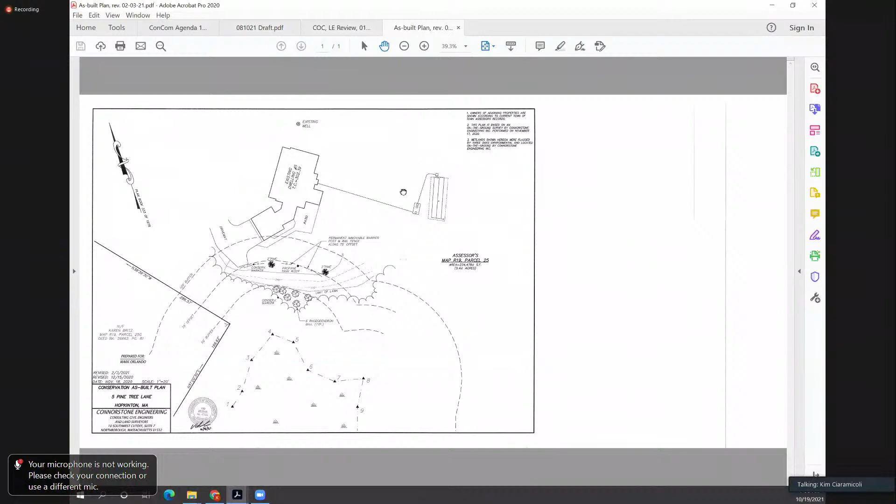So this is one that Matt had provided a review earlier this year, looks like January, and there were a couple of items to be addressed. I think it was PIBs, an underground propane tank, and a stand of Japanese knotweed. The order of conditions had specifically called out that the Japanese knotweed needed to be maintained. I had gone out there again this summer and noted that the Japanese knotweed was not being managed. The homeowner reached out to me to let me know that it had subsequently been managed. I did a quick site inspection this week and was able to confirm that the knotweed has now been eradicated. I was able to spend some time with the homeowner for some education as well regarding management and general good housekeeping, being a neighbor to wetlands.

Okay, great. Thank you, Kim. Questions or comments from the commission members? Yeah, Kim, I just have a question. What did they, how'd they do that?

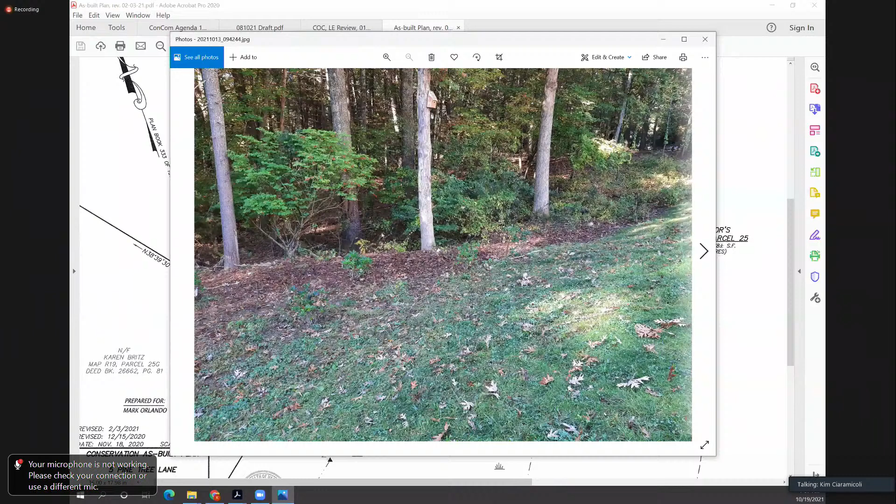Yeah, so he definitely did an application of herbicides. You can see the barren landscape. I had a conversation with him about that's not necessarily the commission's preference. He did have a very large stand that needed maintenance. We talked about in the future, stem painting instead of a large application, and methods for manual removal now that he has it under control. Just kind of a maintenance role rather than an application of herbicides in the future.

All right, good. Thank you. So the chair, this is Ed. Yeah, go ahead, Ed. This opens the door for me to talk about the fact that we've got invasives all over this town, and somehow somebody has got to get their hands around it. I'm not sure who that somebody is, but I will shut up at this point. But this is something I think that Concom needs to look at.

Okay, thank you. Any other comments from commission members or the public? Okay, if I can get a motion to issue the certificate of compliance for 5 Pine Tree Lane, please.

I'll move. And a second, that was Jim. Second, this is Ed. And we'll do the roll call vote. Melissa, Aye. Carrie, Aye. Janine, Aye. Ted, Aye. Ed, Aye. Jim, Aye. And Jeff is an aye.

Okay. Kim, do we have any public forum requests? We have a few minutes. We do not. Okay. All right, let's just jump right into the agenda then.

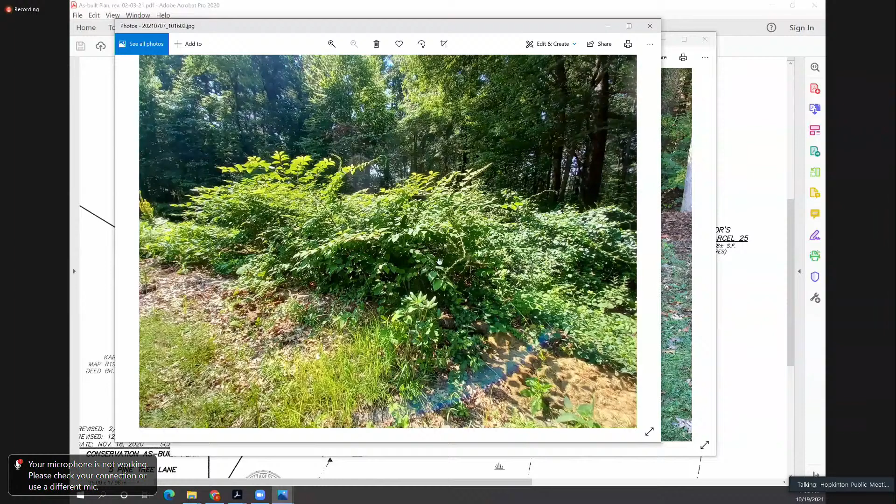Toll Brothers, Lot 12, Chamberlain Street. This is a continuation of a request for reconsideration. Do we have a representative from the applicant on the call?

I see Tim has the plan up in front. I'll make it brief, just a quick history on where we've come to tonight and where we stand. So an order of conditions was initially denied for lot 12 under the local bylaw for the home being within the 100-foot buffer zone. Subsequent to that denial, the applicant requested reconsideration. Along with that request, a revised plan was submitted, showing the home moved forward by 30 feet and outside of the 100-foot buffer zone, providing a very similar design to the other lots within the development that were recently reviewed and approved by the commission. However, to do this on lot 12, we did need a variance for front yard setback from the zoning board, reducing the front yard setback to 30 feet.

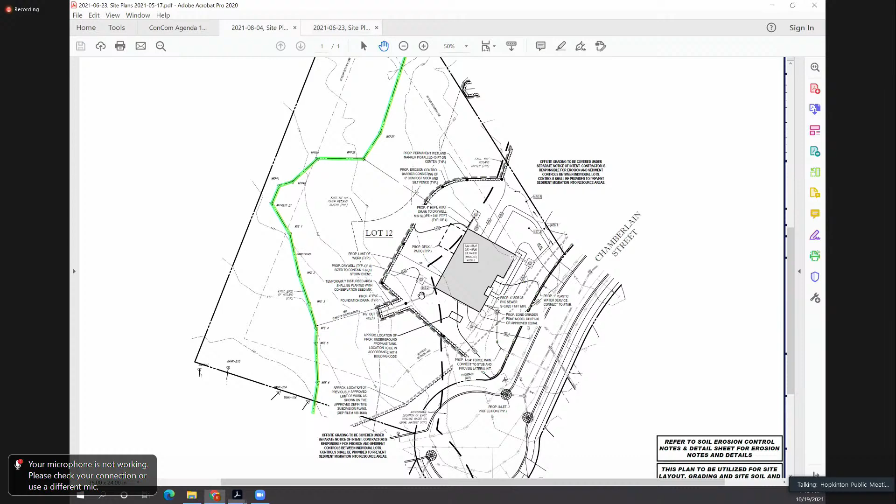Thought that was like communication from interstellar space or something, but anyways, okay.

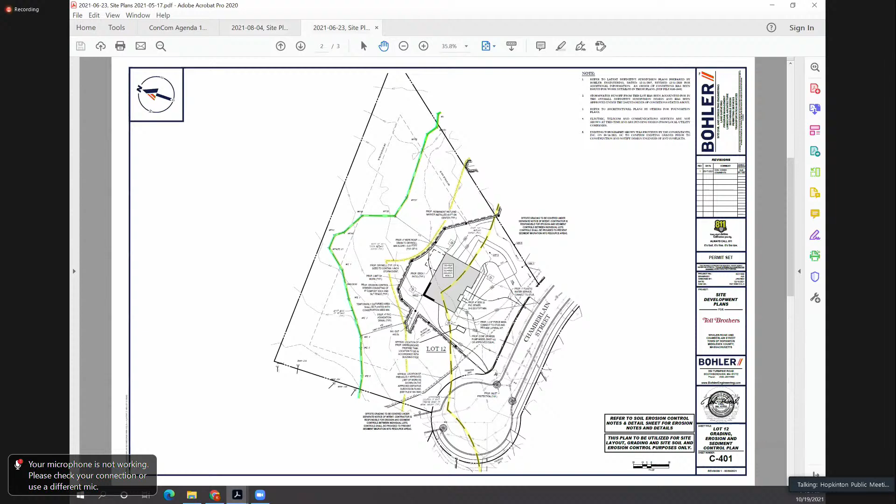McKinnon, 55 Elm Street. This is a notice of intent for a septic replacement, and I have to read this before we get started. The Hopkinton Conservation Commission will hold a public hearing on October 19th, 2021 at 7:00 p.m. virtually online to hear all persons interested in a notice of intent filed by Judith McKinnon, trustee, to repair a septic system with associated site work. The location is 55 Elm Street, assessors map R23, block 21, lot 0.

Okay. Do we have a representative? Yes, can you hear me? Yes. This is Dale McKinnon. Judy McKinnon is my wife. I'm a civil engineer with Guerriere and Halnon.

The design has moved forward. It's a septic system repair. The system is moved forward as close as we can. We got a variance from the Board of Health to move it as close as we could to the road and move it away. You'll notice that the lot is entirely within the 100-foot buffer. The existing system was actually built within 25 feet of the wetlands.

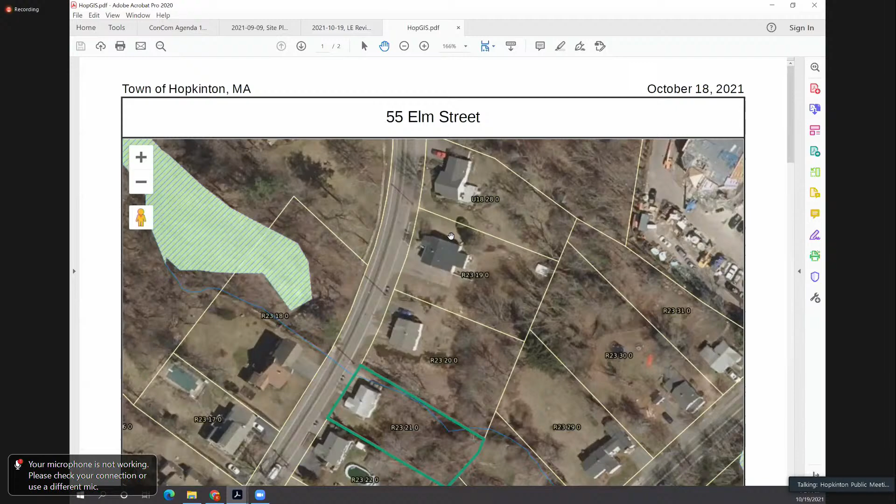Okay, all right. I'm of the opinion that I don't want the homeowner to bear the cost of doing the stream status analysis, to Matt's point, based on the scope of the project. But let me open it up to questions, comments from the other commission members.

I think I'd agree with you, Jeff. There's Melissa, it's a tight site. I don't think they have much alternatives here. Right, yeah, okay.

Okay, questions or comments from the public? Through the chair. Yes, Kim, go ahead. Just for the applicant, if you could describe how the old septic system will be removed, kind of soil management and removal procedures on the site.

The existing system is further in the fill area, so I wasn't intending... you see where the septic tank is proposed, most of the system is in that area. I hadn't even thought about removing that existing system. We're obviously going to excavate near the house, and as necessary, if there is any part of the existing system, it would be removed under the proposed system. But I do not believe that the majority of the system is in where we're showing the proposed fill on the east side of the proposed septic tank. Does that give you the information you look for, or is there something else?

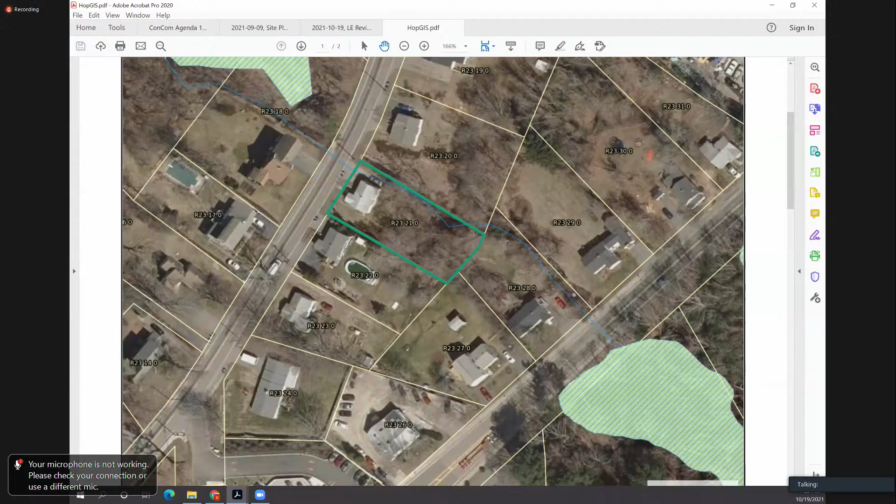Okay, all right, great. Thank you, Mr. McKinnon. Good luck. Thank you. Through the chair, I'd like to thank Kimberly for all her help with us. Thank you very much. Thank you. All right, have a good evening. Good night. You're welcome. Bye-bye.

Okay, Ravenwood, 0 Hayden Row. This is a continuation of a notice of intent for the subdivision.

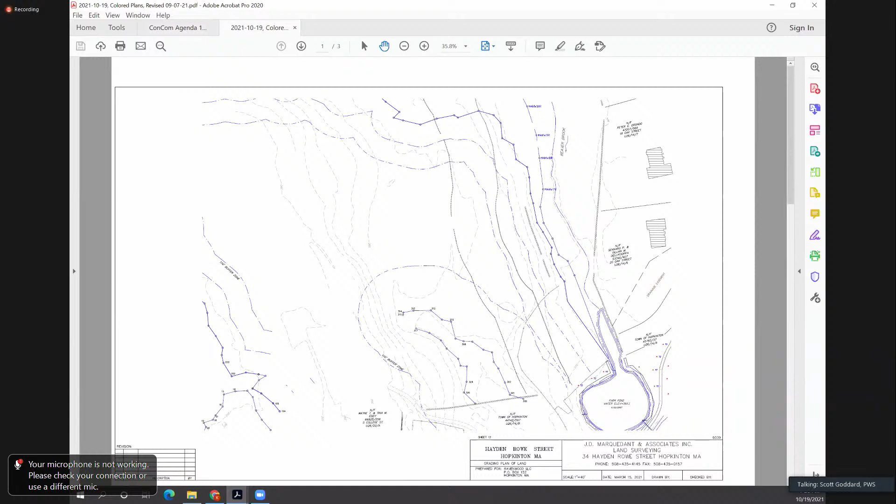So Scott Goddard is here from Goddard Consulting, representing Ravenwood LLC. I guess before we start this hearing, I'd ask the commission how they would like to procedurally move forward with this and the subsequent hearings we have coming up. We filed notices of intent for many of these lots. Should we narrow the focus to just the subdivision at this moment and then go through one lot at a time? Is that how you'd like to proceed?

Yeah, why don't we do that, Mr. Goddard, because I think we still need to kind of vet out some of the issues that were raised previously. I think those may have an impact on the individual NOIs. So if we could go through the subdivision first, that would be great.

Yeah, no, I think that's perfect. So Kimberly has a good graphic of the limit of work boundary overlaying with the wetlands and the subdivision. We've been before you for a couple of meetings on this project, and originally this notice of intent was submitted to include the road and the houses.

Per the request of the commission, we subsequently revised the NOI submittal so that this application before you is simply for the subdivision roadway, which includes a wetland crossing with wetland replication, as well as the utilities, which includes the stormwater infrastructure. That stormwater infrastructure is the work proposed within Riverfront area to Beaver Brook, which is off to the right-hand side of the property.

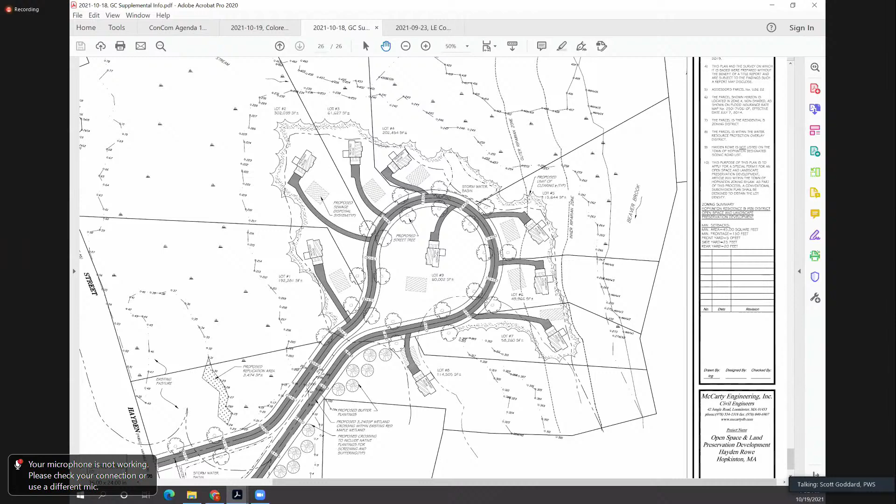We now have 0 houses in the riverfront area instead of 3. And the only work within that riverfront area is stormwater management, which is explicitly excluded from the 10% calculations in 10.58, so we don't even need to count that area against the 10%.

At the end of the day, we're going to have something functioning for stormwater controls that will be a vegetated surface. So it still provides vegetated buffers, wildlife habitat, storm damage prevention, pollution prevention, and the interests stated as reasons why we protect riverfront area are satisfied by the presence of the stormwater management system in this location. So it's our belief—myself, the engineer, Mr. Marquedant, the applicant—that a lot of thought was put into this plan to preserve open space and the riverfront area in its largely entirety on this property.

So that information was included to help the commission understand why and how this design was selected and how it protects those interests. The other items that were brought up in the LEC report and some of the previous conversations with the commission, I think were less significant than those topics and were addressed administratively in the report. If Matt or Kimberly or anyone else on the commission would like to, we can tackle some of those other items, but I think those were the big items that might be worthy of conversation.

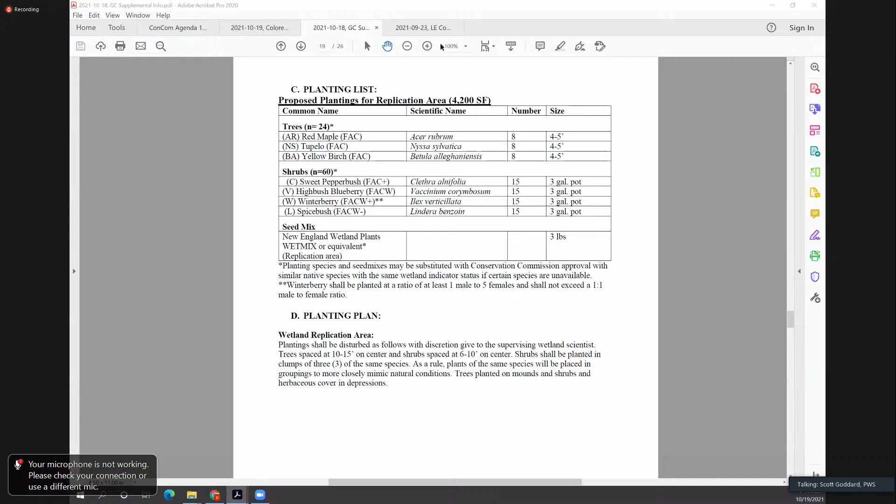So Scott, basically this was submitted yesterday, the update. Yep, so that's kind of what's—I think because this information was submitted yesterday, Matt hasn't had a chance to update his comments. I understand that completely. So this planting list here is the specs on species that were called out, and further down is a schematic on how those species could be laid out.

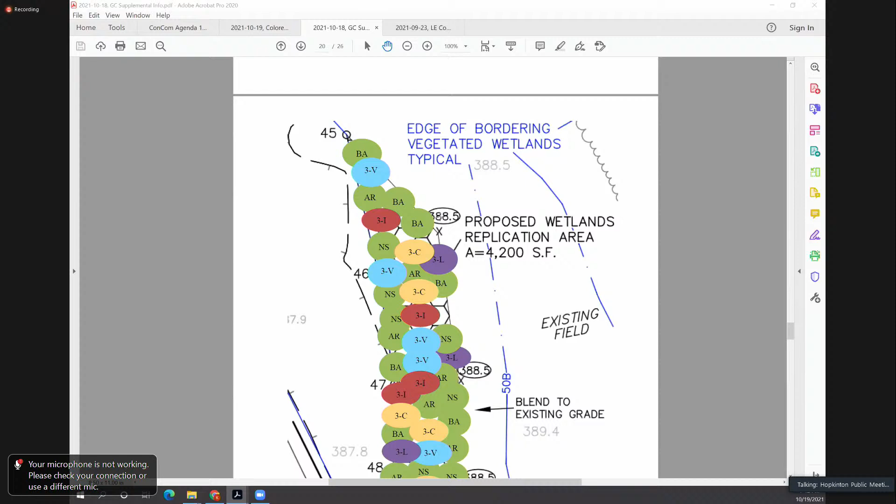Okay, I didn't see it, I didn't realize it was an attachment. Okay, and I think we basically decided that rather than get into all the machinations of maintaining something as a wet meadow for the small amount of total square footage we're talking about, it's easier to guarantee the longevity of success with the forested methodology. That's all. Okay.

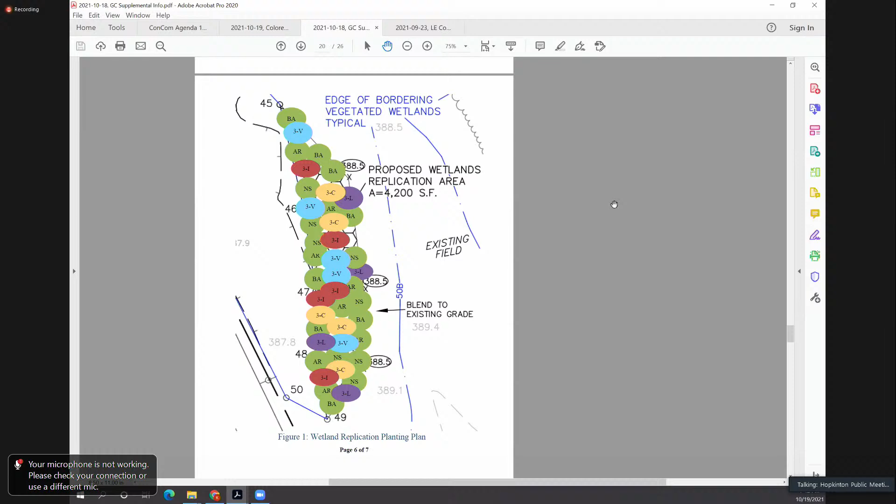Okay, and the last comment I had before I hand it over to the other commission members was on the riverfront area. I appreciate the work you guys did pulling the individual houses out of the riverfront area, I think that's great. I just think there's an opportunity, and I think that's the right area for the detention basin. As you mentioned in your overview, Scott, that's kind of the low elevation at the site. So I agree with it.

But I think there's an opportunity for pulling that detention basin a little bit further out of the riverfront area, and minimizing or decreasing the lot sizes or yard sizes in lots 6, 7, and 8. So we don't go as far back with the lawn area, which would allow that detention basin to be pulled out of the riverfront area a little bit further. So that's my only comment there.

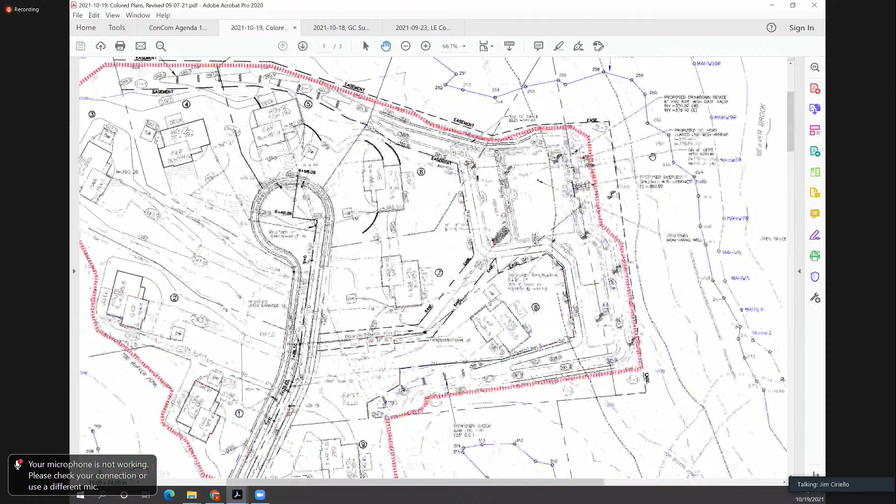And I'll open it up to the other commission members for their questions and comments. Jeff, this is Jim. I just have one comment, and that is that I think the construction sequence and construction plan needs to be part of the order of conditions, so it needs to be submitted before the order of conditions is issued. That's it.

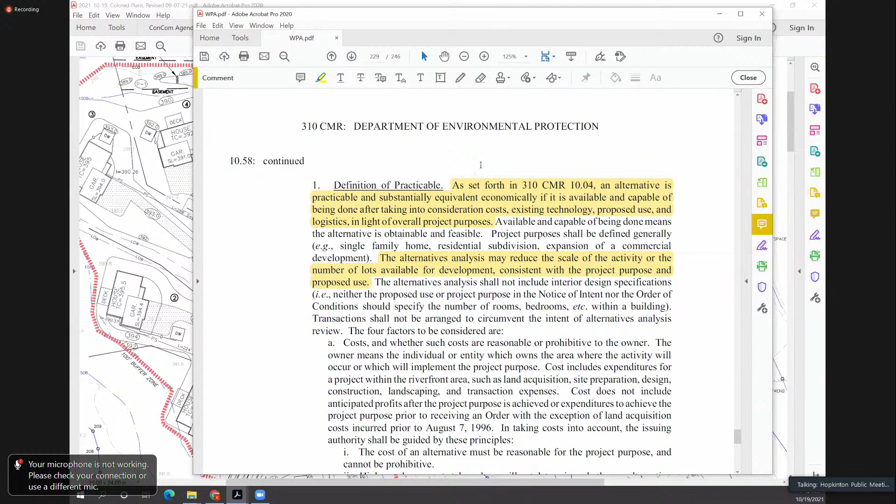Yep, that's helpful Kim. That definition does deal with the practicableness of it. As we saw from the Chamberlain subdivision project, it wasn't riverfront, but there was a practicable alternative that ended up reducing the number of lots on that project. In that case it was fewer lots, larger houses, and the economics of those houses became different. So there's an economic component because it's an economically equivalent practicable alternative that is considered. The practicableness is one part, but then there's the economic piece tied to the evaluation as well.

Right, and in Chamberlain that was a conventional subdivision, not a cluster. So in this project, what Mr. Nation is doing is a cluster subdivision, which means reduced frontages, narrower lots. These houses aren't going to be at the same humongous scale as some other subdivisions might support, so the economics of this scale of house versus a different scale plays into that analysis. One lot here makes a big difference on this project.

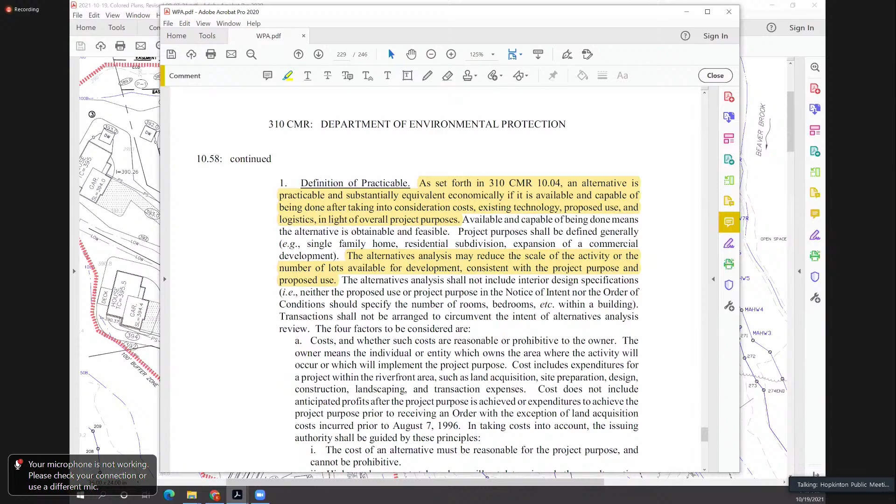And like I said, I'm not averse to having the detention basin in a portion of the riverfront area. The 10% alteration is at the discretion of the commission, it's not by right. To my earlier point, I think there's an opportunity where that could be pulled out a little bit further out of the riverfront area.

That's my opinion, Mr. Chairman. If Joe could chime in here for a moment, I think it would be helpful. Yeah, that's what I was going to suggest. Joe's looked at this a little bit. Joe, you there? Yes, I am.

Would it be helpful, Joe, if you could comment on how these are sized and located, and what efforts we took to shift these things around in order to preserve that riverfront zone? Oh, absolutely. As Scott touched on before, there are a variety of design reasons for the placement of the basin, to get as low as we can, to get in the flatter areas of the site, use other steeper areas more for conveyance, and here for the infiltration.

We've chosen this location to capture all the water that we can, so that in other spots we can reduce the clearing associated with the infrastructure. We've left what we feel are sufficient backyards to balance the two interests. We've attempted to pull it further from the resource in order to minimize the concerns of the commission, which was the reason for the change we made. But it's the balance we're seeking: enough room for these homes and yards, and still an effective way to capture and treat stormwater.

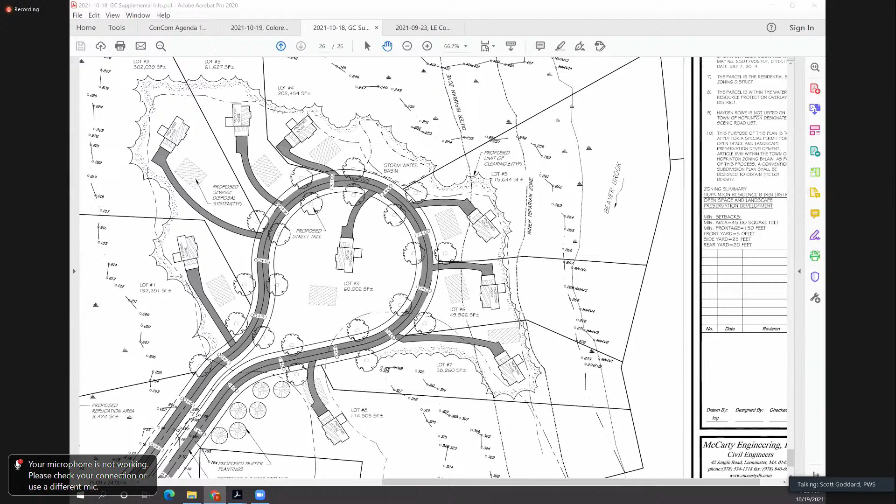I've done hundreds of these types of analyses, and this is the kind of process we go through in order to bring the best project before you. A lot of work goes into planning and designing this. I don't just like to bring proposals that are outlandish, knowing you won't approve them, just to get beaten back. I see certain applicants and consultants do that kind of thing, and that's not productive. This is a sophisticated board, so it takes a lot of time to come before you with a good project. And I think that's been done here.

Yeah, no, we appreciate that, Scott.

So, looking ahead a little bit here, when we look at the individual lots for 6, 7, and 8 on the single family homes, in the past couple subdivisions approved by the commission, there was yard work proposed close to the 50-foot buffer zone. The majority of the commission was asking for the yards to be minimized and pulled further away from the 100-foot buffer zone.

So, back to my point with the detention basin - I heard Mr. Marquedant say there was a balance between what was required for the proper engineering of the detention basin, balanced with the yard size you feel is necessary for the houses proposed here for 6, 7, and 8. Again, I just think there's an opportunity to possibly pull that a little bit closer without impacting the effectiveness of the detention basin.

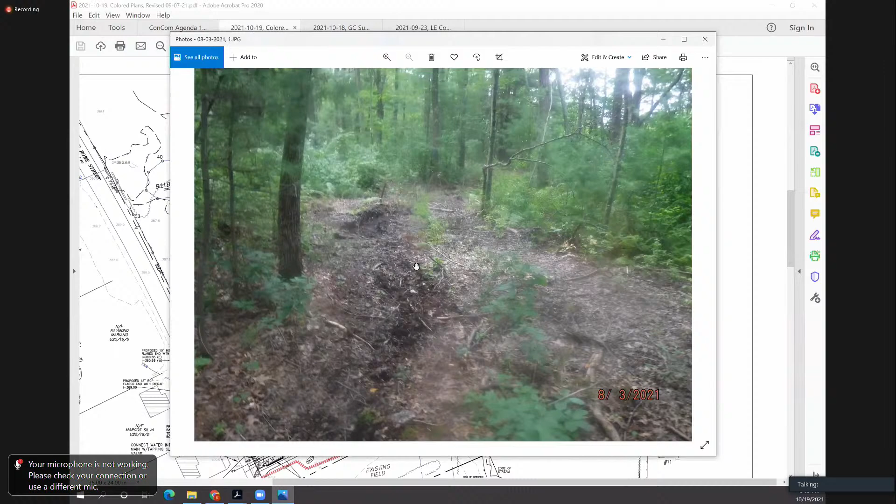Oh, sorry Matt, go ahead. I forgot that - I guess my question would be, is there any data to back up Mr. Goddard's comments as far as wildlife studies or anything like that in this area?

Yeah, Matt, if this is an important topic to you and the commission, we can dig into the literature a little bit and deal with this issue. Seems important to Mr. Harrow, and I won't speak for the rest of the commission, but I think it's certainly one of the more important values and functions of wetlands is wildlife habitat, and I think it's a legitimate discussion point.

Yeah, if you want to do some research, Scott, I get your point from a practical standpoint - trying to divert the wildlife to a culvert in one section of the roadway for the crossing is probably going to be difficult. The animals are going to go where they're going to go, up over the road, particularly if there's gentle slopes. But if you could look into that, it would be helpful to satisfy Mr. Harrow's request. Okay, thank you.

Okay, questions, comments from the public? All right, so we'll continue this to our next meeting, which is November 2nd. If you can just send Kim an email, Scott, that would be helpful. Will do, thank you.

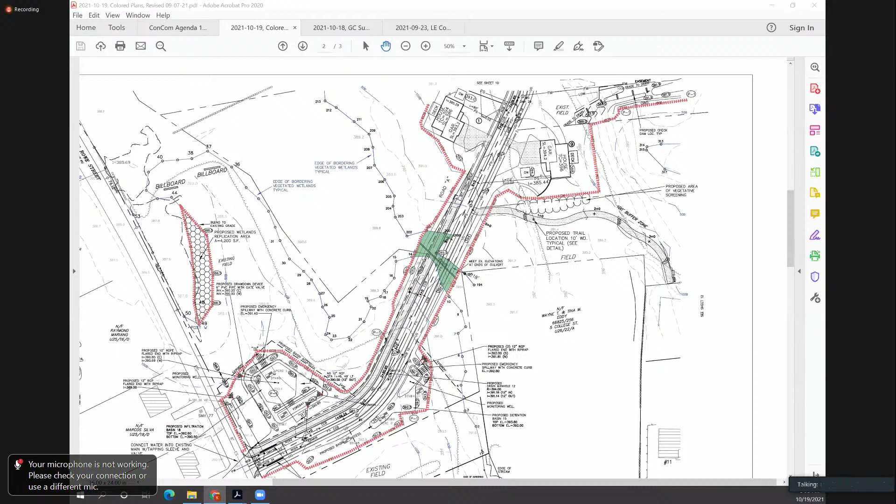All right, let's start with Lot 1. So I emailed over to Kimberly - what I did with each one is create a map to show which lot we're talking about in its broader context, and then a colored up map of the specific work being requested on each lot, so it should help our discussion so we're all oriented as to what lot we're talking about. So the first one here is Lot 1, which is the first lot to the left after you go over the wetland crossing. That's the area outlined in yellow.

So we submitted a notice of intent. DEP issued a file number, 188-1766. I believe 3 of the applications were granted file numbers and some of the other ones were not.

So this is work for a minor amount of grading and lawn within the buffer zone. On Lot 1, none of the house is proposed within the buffer zone. The house is tucked up to the road based on zoning setbacks, and the 50 and 100-foot buffer zones are outlined in red to the approved wetland line per the ANRAD.

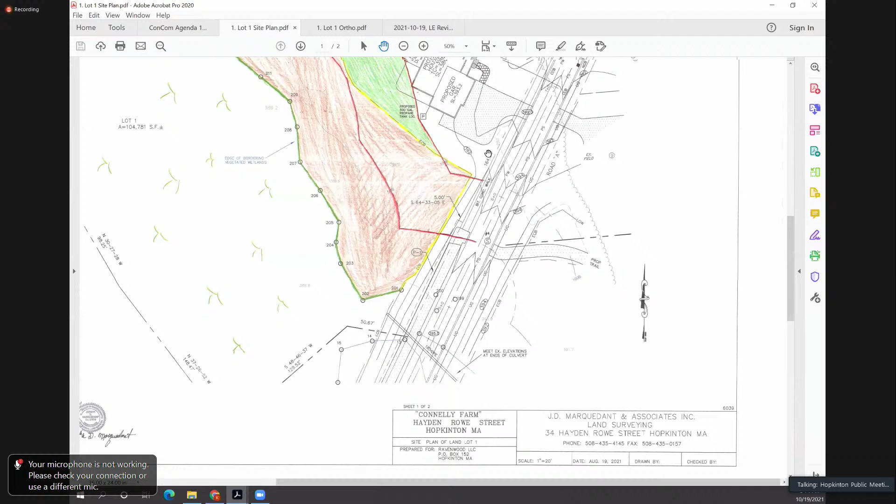Also throw out for consideration, it was a cluster development. There is—and I don't recall the total acreage—that's committed to open space. I don't know if you have that number, Mr. Goddard. But that all plays into the 50 to 100-foot discretionary kind of disturbance that the commission allows, right? So I just ask that commission members also consider the open space, the cluster development, as additional factors when you're drawing your conclusions and decisions on this. Not to sway it either way, but I just want to make sure you're cognizant of that when going through the thought process.

Mr. Chairman? Yes. 18 of the 32 acres is preserved as open space. Okay, thank you.

So I wanted to throw that out there just so everyone has it at top of mind.

Okay, Scott, I think you have your feedback on this one. Well, Mr. Chairman, I'd like to make a broad response to it, because we're heading down a path of having a similar conversation seven more times. So I think it would be helpful if I share some of my thoughts now, and then I can just hit the repeat button in the future rather than restating it.

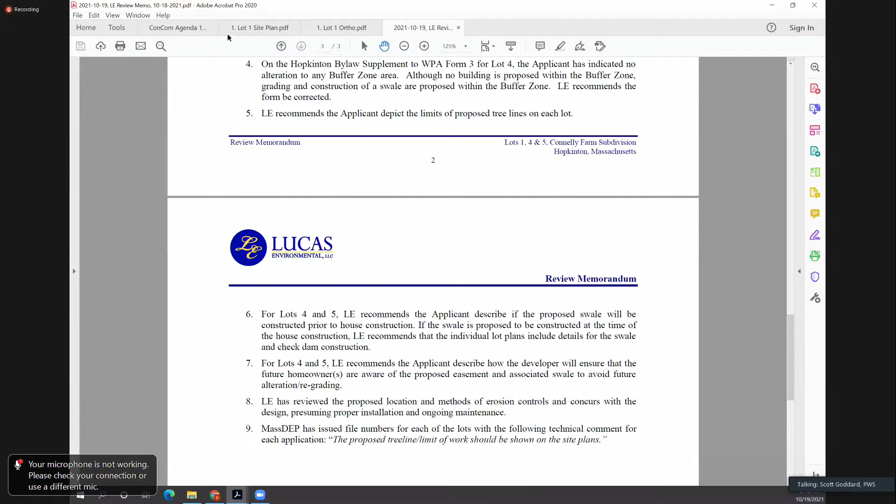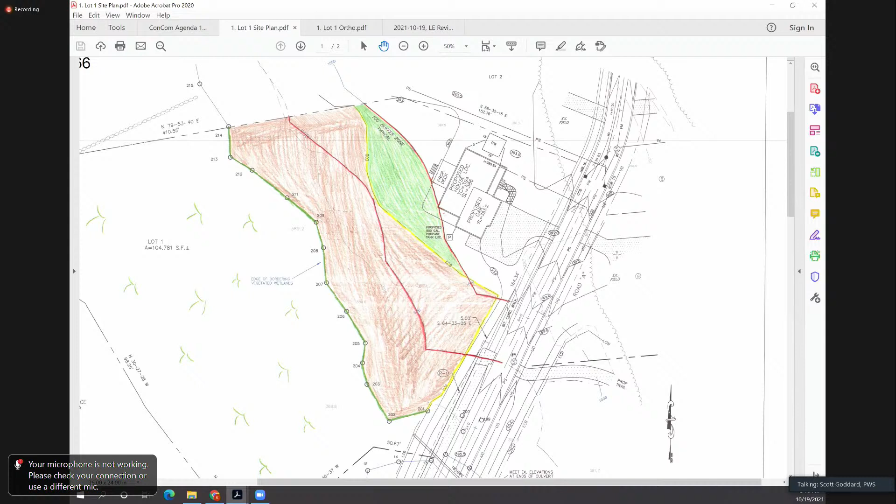Makes sense. I do a lot of work in Hopkinton, and I've been before this board many times over many years, and I've watched it change personalities and dynamics as the regulations have been implemented. I've seen different types of projects come through, and Hopkinton has a great board. I go before hundreds of towns in Massachusetts, and probably 100 on a regular basis, and Hopkinton is an excellent board with a good set of regulations to work with.

So I'm not ignorant when it comes to understanding the dynamics of commissions, nor am I ignorant on how regulations are written, and the difference that happens in their interpretation based on the dynamic of a commission at any given point in time. That said, it does seem there's been a shift over time in the view of the 50 to 100-foot buffer zone that has not necessarily mirrored a shift in the written regulations.

There was a time in Hopkinton where the regulations stated there's a presumption of protection of the resource area, that is the wetlands itself. There's a presumption that they're being protected if you keep your work, not just grading and lawn but structures as well, outside of certain buffer zones, and that the limit of work for your yard was kept out of 50 feet. It even states you can have driveways up to within 10 feet of a wetland, and there's a presumption of protecting the interests of those wetlands.

And I know it's been kind of a popular sentiment with the board to treat the 50-foot as completely discretionary on behalf of the board. Now, it is insofar as applicants rely on the vote of the board. But the way the regulations are written, and I've written narratives on this, particularly on the Lot 12 analysis for Chamberlain most recently, but on other projects as well, there is clear language in the bylaw that states that wetlands are presumed protected if these setbacks are satisfied.

So likewise here, notice of intent was submitted. The 50 and 100 foot buffers are shown in red. The house is, again like lot 1, completely outside of the buffer zone. And the lawn area, again very similar to lot 1, is split between the 50 and 100. We're not proposing work all the way down to 50 - it's sort of at a midway point. That gives the applicant an appropriate and saleable asset for the buyers, and also preserves the 50-foot and then some of the buffer zone. I don't think this one has been assigned a DEP file number yet.

Okay, I'll open up to comments from the commission members. Hi Jeff, yep go ahead Ted. In the interest of time I'm just going to bite my tongue as we go through these. If there's green, I want to know if it can be minimized - that's my comment for all of the lots coming up. Any other comments from commission members? Comments from the public?

Okay, you want to move to the next one, Scott? Sure thing. Just for the record, since this is technically a separate application, I would echo my earlier comments as applicable to this application as well, and to all the subsequent ones. So I understand Ted's position - I do, and I don't mean to dismiss it Ted, but my comments will continue to be the same. Through the chair - yes go ahead Ted. And again, Scott, I am not saying there should be zero green at all. I just sense in the lots I've looked at that we can cut back how much lawn is there. So I'm not trying to be unreasonable either. Hopefully we can continue to get along. Yeah, no problem.

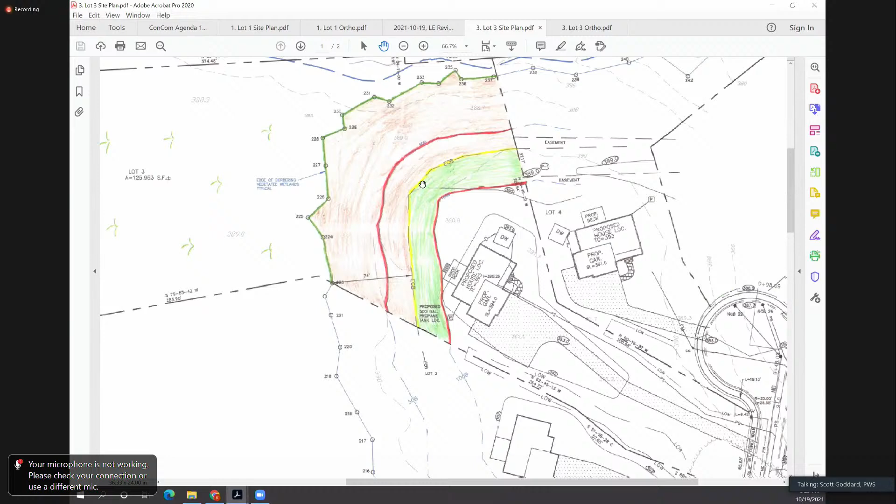So this is lot 3, I believe we're looking at here. Yep, and we can scan down. Again, just working up the left side of that subdivision road. So the discussion for lot 3 mirrors that of lot 2. Again, the house - to the credit of Mr. Nation and Joe Marquedant, I think they did an excellent design here to shape these lots in such a way. You can see how they have a narrow shape by the road. That's to keep the reduced lot frontage for the cluster. But it also makes it so the houses can't sit up close to the road because of the narrowness of them, pushing the house back until the lots widen a bit. But here again, no house within the 100-foot buffer zone. I think to the applicant and engineer's credit, they did a good job with the design, and there's the same 100-foot discussion, more or less splitting the difference between lot and open space, and preserving the entirety and then some of the 50.

Okay. Lot 4. Or lot two. Yep, go ahead Matt.

Just a quick question on this lot, and I understand it's outside the buffer zone, but I think it gets back to the location of the house and which gets into the backyard. It seems like there's an extremely large area of pavement in front of the garage there. Is there a reason for that?

Basketball court? Well, I think Joe can maybe comment on this. I think it has to do with the turnarounds, but there's also some angle points on the property lines there that set the sideline setbacks, which I think are dictating where and how that house sits. Joe, am I thinking about that right? Joe, are you still with us? I'm still here, yep. No, the driveways are set up - the garages are set up for 3-car garages. So that was simply a means to move the vehicles out of the fronts of those and establish something slightly more than the minimum. We had a bit more area on that, so this should allow the turning radius and the function of the vehicles to be more effective.

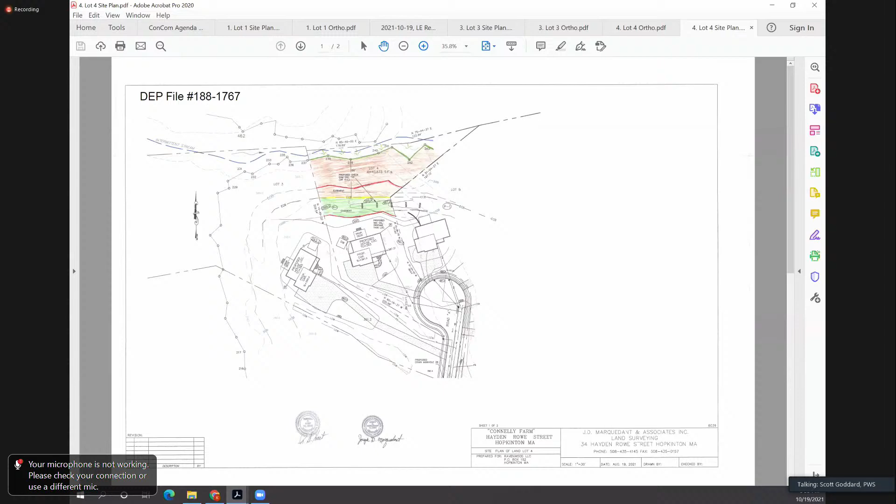So on this one, it's a little different in that we're coming into the swales around the back of the property. We have the house well situated outside the buffer zone. We see the 50 and 100 foot lines in red. The ECB is dictated by the down gradient placement of the swale.

So it's almost less that this element is there for the purpose of lawn, although the left-hand side might function a little bit as lawn, but it's largely to capture the back end of the swale as part of the groundwater system, the surface water system outlined in the subdivision notice of intent.

And the easement there, Scott, is for the swale? Correct. Is that correct? Okay.

Through the chair. Oh, Carrie, go please. Well, Jeff, you get to decide. Go ahead, Carrie.

So seeing that the swale goes across numerous properties, and most people want to put a fence around their yard and the lawn, what provisions will you have to make sure that swale maintains as a swale and that water can flow freely without any obstructions between the properties?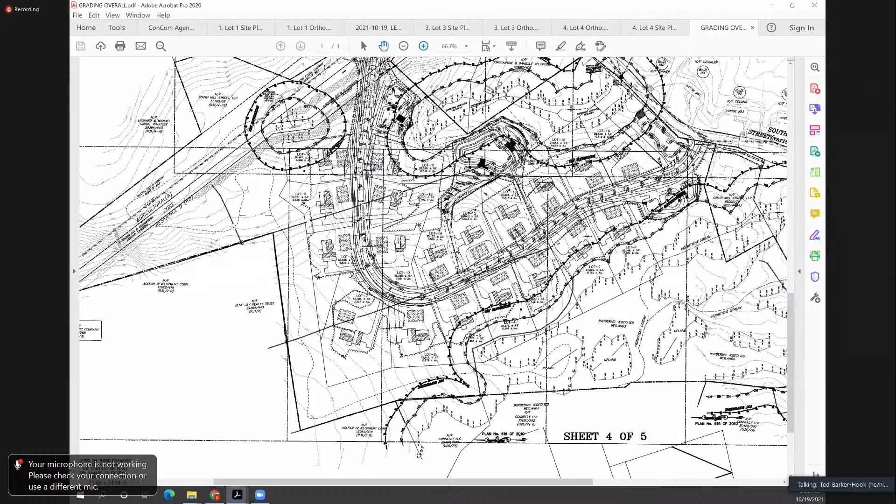So thanks, Chair. Yeah, go ahead, Matt. I'm just wondering if it would be helpful for the commission to hear from, presumably from Mr. Marquedant, sort of the purpose of this swale.

Typically the site drainage design is collecting water from impervious surfaces such as the roadway, driveways, potentially rooftops for treatment, and then detention or retention. And this kind of gets back to my comment that Mr. Goddard raised earlier about potentially redirecting water that would naturally be flowing to the wetlands to collecting it and sending it to a single point.

If Mr. Marquedant just wants to discuss the reasoning for having these swales at all, especially with consideration of concerns of how they may be maintained and function in the future. But Jeff, if that's not of interest, feel free to ignore.

No, I think that's a good point, Matt. I mean, Mr. Marquedant, does it make sense to just allow that flow to head north there towards the wetland as opposed to being redirected in a swale to the detention basin?

I guess that's a good question. The issue that came up at the planning board level was the two catchment areas, one to the north and one to the south. The northerly limit of that catchment area contributions are the wetlands edge, and the same thing down at the bottom of the plan at the wetlands location there. The catchment areas were the actual wetlands edges themselves. We put together our designs, the changes.

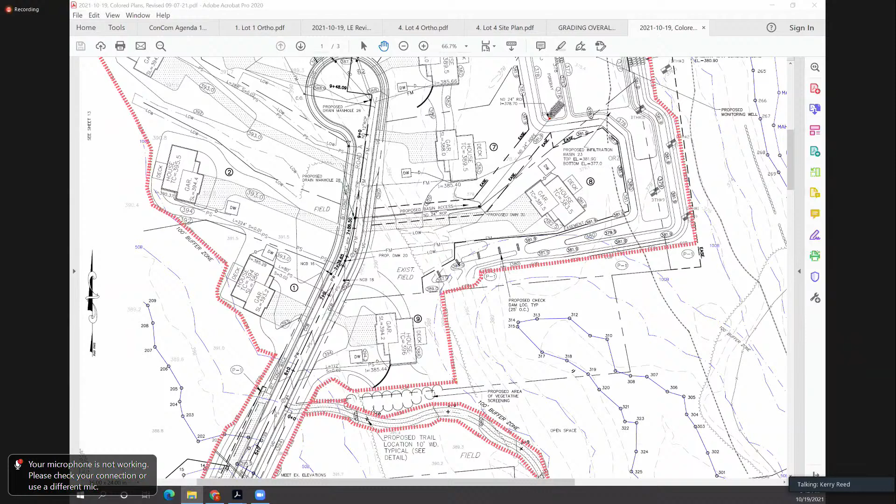Okay, I think that makes sense, but I'll defer to Kerry and Melissa on that. That was BETA's recommendation, I'll chime in. I understand what you're saying. I just don't think that you necessarily need this BMP to meet that intent.

And this just looks like it's going to be difficult to maintain. Usually I like swales and green infrastructure, but I don't trust homeowners to maintain communal BMPs. So that's just my opinion, but we can move on to the next one.

But this was a recommendation from Beta, Mr. Marquedant, is that correct? Correct. Well, not particularly the swales, some mechanism to manage, to mitigate stormwater, but there's a lot of mechanisms that can be used.

Okay. Through the chair, may I ask a quick question? Not on swales. Sure. Kim, could you show us the other map of the whole project again, please? It was just up. What is that red dotted line all around the whole thing? I was assuming that was limit of work, but that doesn't seem to match what I'm seeing on the plans of the individual lots, given where the lawns are.

Yeah, that's not the limit of work. That was just something that was drawn on there. So I would discount that for the purposes of this conversation. It's just the extent of what this plan shows, but it doesn't show everything since the lots have been developed separately now.

Okay. So let me just ask the commission, is that a problem that the plans don't agree as we're discussing these? And this is only a graphic for presentation purposes. That red line doesn't appear on the Marquedant submittal plans. Simply just outlining where the plans that were submitted initially do show activity, but this was again prior to us having individual submittals. Okay.

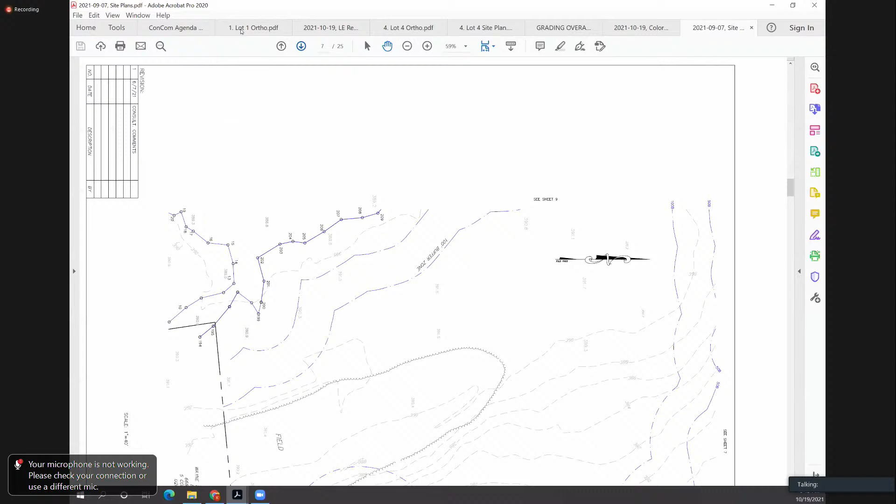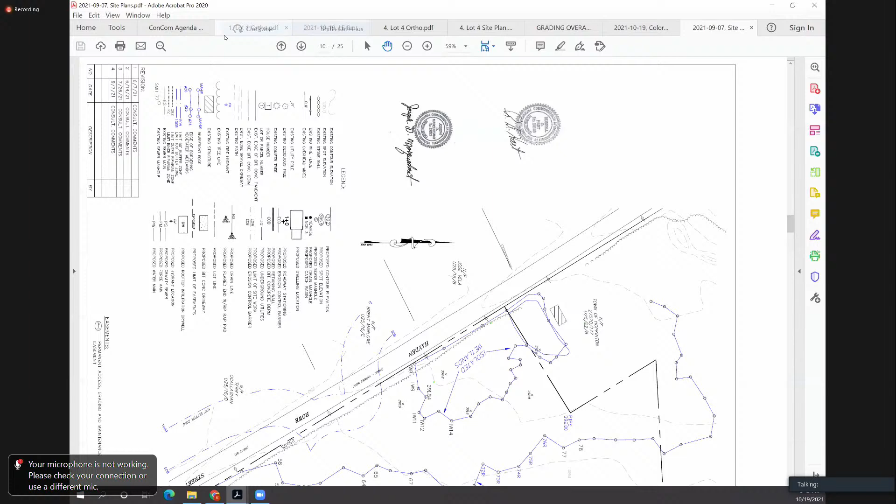So this is the actual plan that Mark went and put together here. Yeah, Jeff, this is the most recent revision of the plans from Marquedant, at the 1:40 scale.

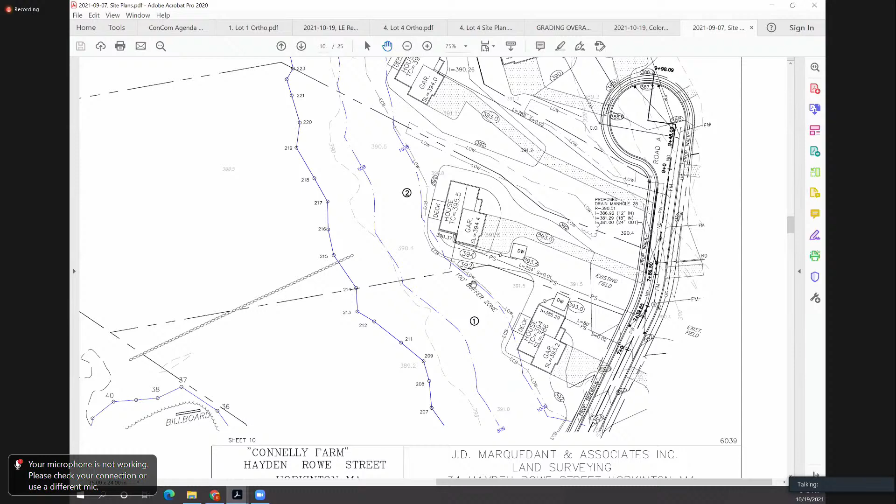Through the chair, that plan does not indicate limit of work. Is that true? Looks like it does not. I see a couple down in the center of the plan there, right where your cursor just was. There's the ECBs and there's a limit of work demarcation between lots 1 and 2 there. Kim, see that? The LOW, the planning board limit of work. Yep, that one. And I see this ECB line now too.

So again, I don't think that we make sure it matches. We'll either have to match them up or remove it from the subdivision plan.

Mr. Chairman, if I may. Yes, go ahead. By way of explanation, I made the choice to leave the subdivision set alone because we hadn't had the opportunity to fully discuss these issues. I didn't want the commission to get the impression that we had one set and then in the interim I submitted something different. With us continuing our last meeting and not having the opportunity to flesh out these issues, I left the subdivision set alone. For our next hearing, the subdivision set will be updated to match the individual plan submission. Okay, thank you for the clarification.

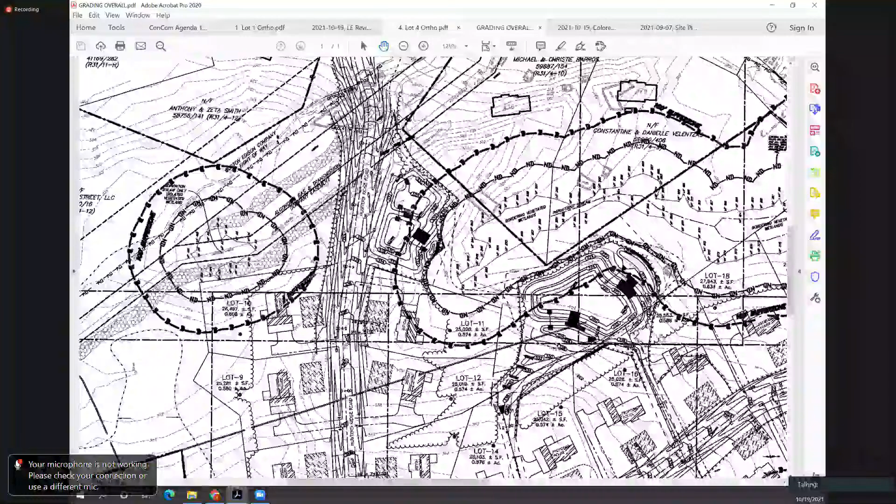Yep, so again, moving clockwise around the cul-de-sac, lot 5. So nearly an identical presentation to lot 4, which is that the limit of work for the swale as outlined in the subdivision mirrors the limit of work line for the house. Effectively, we're just going to have a small area of lawn between the swale and the house.

When I was looking at this, I was thinking, boy, if the work is only the swale, do we even need to file an application for lot 5? But there is a small amount of work proposed. Kim, can you zoom in a little bit on this? I think this one actually clips the house and deck corner as well, so that was included. And then the lawn comes just up-gradient to the swale.

So if the swale is accepted as part of the subdivision, then I think the balance of the lot 5 plan is a fairly straightforward assessment, since all the work is on the upgradient side of the swale.

Okay, questions, comments from, yep go ahead, Kerry. So this is another one, like the easement goes right up to the house. It just does not seem like it'd be feasible that the homeowners would actually honor that easement. This doesn't seem like a feasible stormwater design to me.

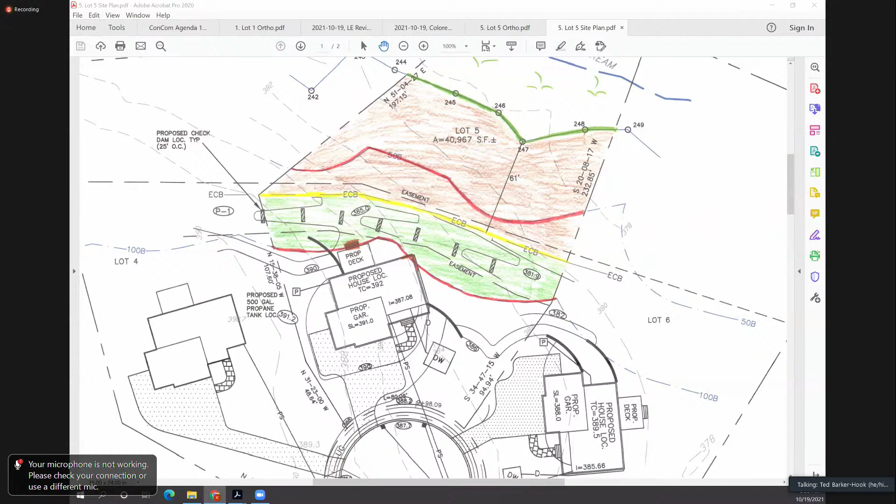Through the chair, yes Ted. Quick comment on driveways. I realize we're talking about a lot, whatever number that is colored in, but I see 3 lots, and I realize this is outside the 100-foot buffer, so maybe what I have to say has no bearing at all. But every one of these driveways has what strikes me as a very odd extension of pavement to the left and beyond the front of what I assume is a garage. That seems odd and unnecessary, and not terribly environmentally friendly to me. I'm wondering what that's about.

That was simply for the use of the homeowners - storage of additional vehicles, the ability to set up something in that side yard, and it should be in that driveway, using that area. So through the chair, in addition to a 3-car garage, there needs to be room for more vehicles? Correct. Okay.

Yeah, I mean, it is outside the 100-foot buffer zone, so it's not within our jurisdiction, but it strikes me as being a little excessive too. Chair? That's at the discretion of the builder.

Yes, go ahead Matt. Yeah, I think it's a legitimate point, in looking at this, and Mr. Nation mentioned that one of the lots did seem to have a bit of excessive pavement. I guess the question is, if this pavement were to be reduced, would there presumably be less impervious area, less flows, and would the calculations result in a smaller detention basin? Getting back to where the detention basin is in the riverfront area, is the basin so big because we have these giant fields of pavement in front of these homes that's driving the size of the basin and the need for that additional disturbance in riverfront? Just a thought.

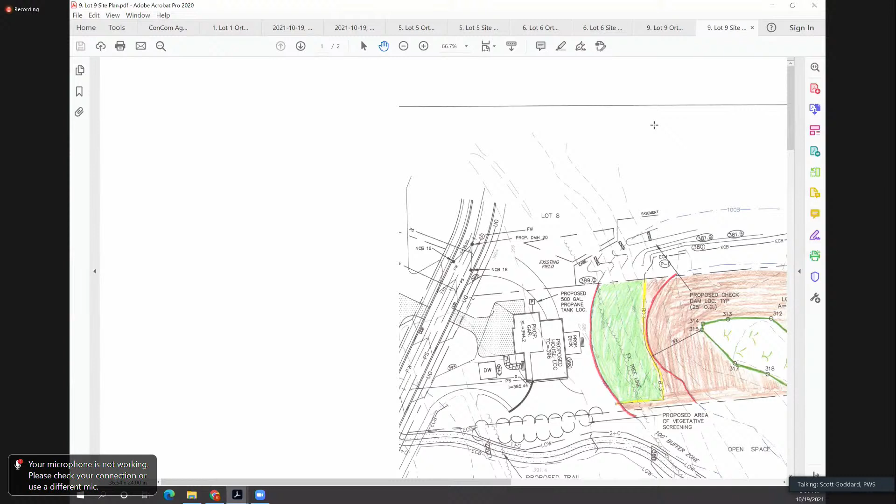And then the last submittal was lot 9, the final one as you go around the flower of the cul-de-sac. Again, house out of the buffer zone, and work proposed within between 50 and 100 of proposed lawn. Of all of them, this is the one with the lawn closest to the 50.

Okay, questions, comments from the commission? Through the chair, this is Ed—I'm going to save Ted—but taking up the entirety of the 50-foot buffer with lawn is, in my opinion, a no. Thank you.

Okay, sure, yes Matt, go ahead. I'm just looking at the plan here. There's an existing tree line on this lot, and I think we've been over this a few times, but where there's an existing tree line, I was wondering if there was consideration to just limiting the lawn to where there's already a natural break. That would make sense to me.

Matt's far more sophisticated in his analysis than I am. And as we round this out, this pretty much rounds out the discussion. If I could, leave the commission with just a couple of high-level points. To the applicant's credit, I think when I look at this from a wetlands perspective, I see 9 lots on a cul-de-sac proposed, and you did not hear very many points about infrastructure being proposed within buffer zones or riverfront area.

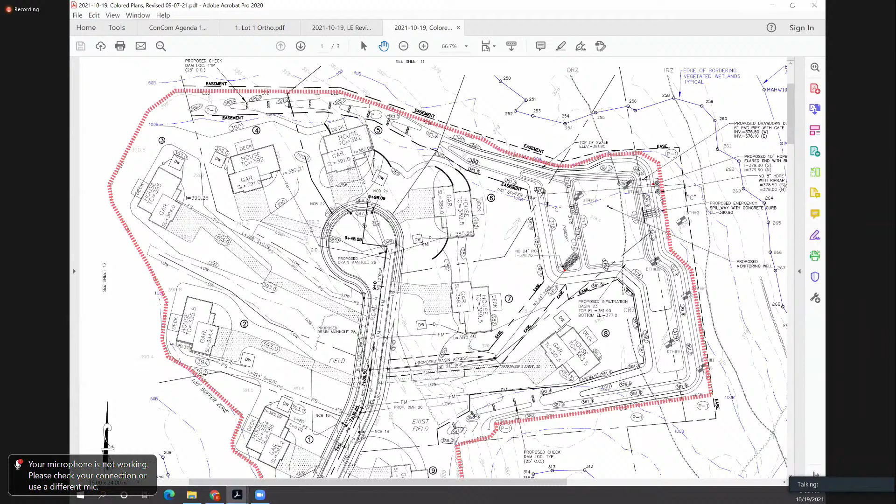Thank you, Mr. Markman. And while I'm still on this meeting, I just wanted to confirm that 103 Wood Street, the continuation request was received and that will not be heard tonight. We're basically making some modifications to that based on the peer review. Through the chair, was that request received? Through the chair, yes, I received that email right at 7 o'clock. Thank you, Anna. So we did receive it. Good. Okay, thank you, have a good night.

Okay, Peoples, 144 Spring Street. This is a request for determination of applicability for a septic replacement. And I have to read this, so bear with me here. The Hopkinton Conservation Commission will hold a public hearing on October 19th, 2021 at 7:00 p.m. to hear all persons interested in a request for determination of applicability filed by Brandon Peoples to replace a septic system with associated site work, location 144 Spring Street, Assessors Map R15, Block 7, Lot 0. Took a couple seconds for that to come up. Okay, Dan McIntyre representing the homeowners.

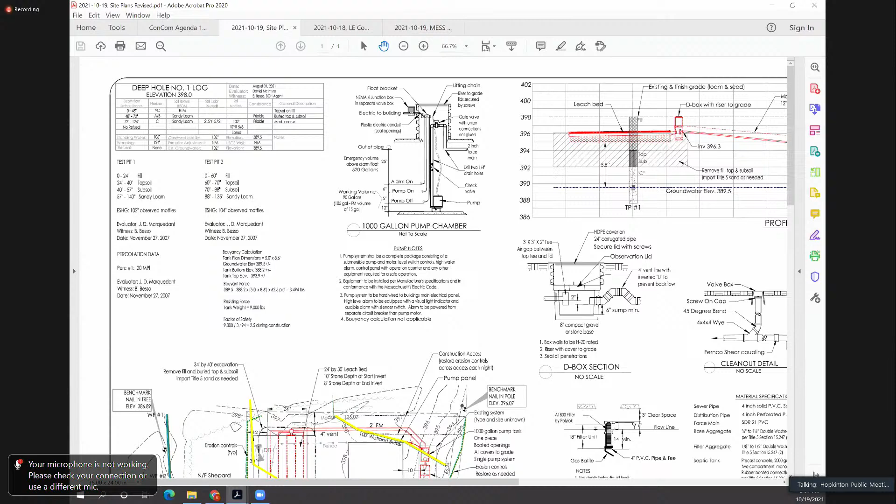Good evening, Mr. McIntyre. Good evening. You want to give us an overview, please? Sure. This was a lot that was developed back in the 1950s, originally as a little manufacturing plant down there, but at some point it got converted to a single family home. To orient you, there's Spring Street on the right-hand side of the plan, the house in the middle, and a garage with a paved driveway. The existing septic system is in the front yard in that sloped area between the house and Spring Street.

There is a wetland identified in the back, partially off the property. If you're familiar with this area of Spring Street, behind this house is a very steep hill that comes down to the street. The groundwater tends to break out at the base of that slope and created this intermittent stream and associated wetland that travels under Spring Street and eventually to Lake Whitehall.

So we're proposing to replace the system with a new system in the backyard where there's more land availability, and put the tank and a pump tank in the front yard, because there was no way to change the plumbing inside the house to get the tanks in the backyard. So it'll be pumping around the side of the house to a leach bed out in the backyard. The backyard now is essentially flat, it's all lawn back there. So the work will require no additional grading changes, no tree removal, and will be restored as lawn when complete.

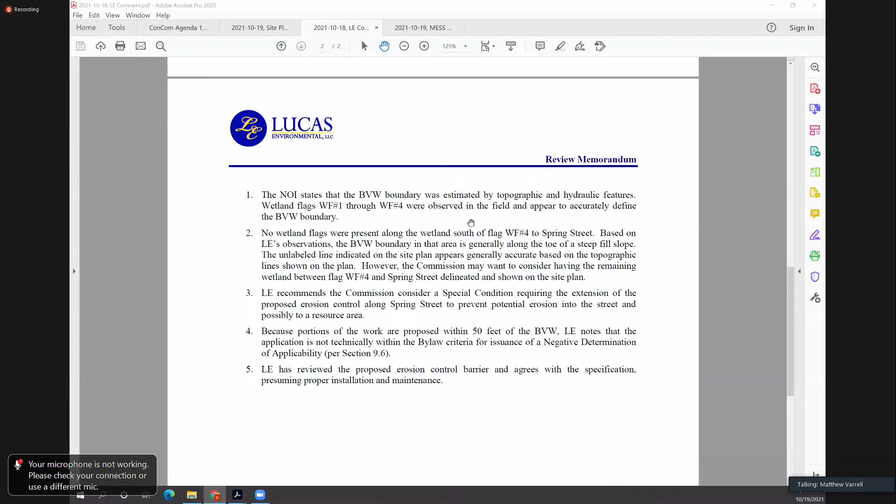Yeah, I mean, I was just pointing out what the bylaw says. Obviously it's at the discretion of the commission. I guess I would leave it to Kim to chime in if she feels any risk of setting a precedent here or not.

Yeah, I would also point out there is an old order of conditions on this site for a septic that was never constructed, but that was also filed through the notice of intent process. So of course it's the purview of the commission, but my hesitancy would be precedent. Does the commission feel confident in their ability to appropriately condition this site under a request for determination of applicability, which does not get recorded to the deed?

Yeah, if I may chime in. We did file this as an RDA, knowing that we are encroaching into the 50-foot buffer slightly. But unlike other lots that we filed an NOI for, this is really previously disturbed. There's no new grading taking place here. Unlike what we saw previously at 55 Elm Street, where there was significant grading and slopes in the buffer zone, we don't have that here. We don't have any tree removal. We're not asking for any waivers to the groundwater offset from the Board of Health. We actually have more than the 4 feet required to groundwater for this septic system, which is a vast improvement over what's out there now. So we really ask the commission to use their discretion and allow this. I don't think it's going to set any precedent other than for a very similar lot to this, which there aren't that many of.

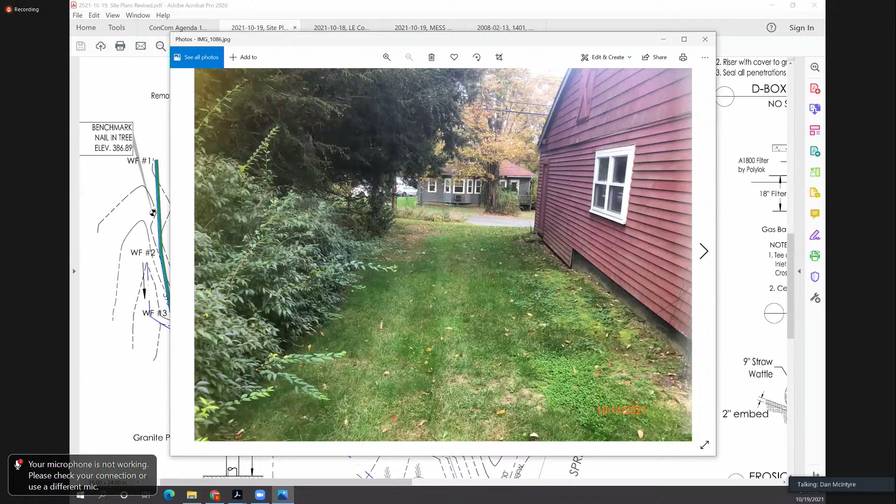Okay, I think I'm good with it. Let me just open it up to the other commission members for their opinion. And no grading, previously disturbed, no tree removal, I think I recall you saying.

Melissa, Carrie, what are your thoughts? I think my gut says it's okay. I'm wondering if we can just file the list of those reasons with the determination, maybe. I think we can certainly document it for the project record. Is that what you mean, Melissa? Yeah, I guess just if it comes up in question of why we did it here, kind of put a rationale together.

Yeah, I tried to do that in my response to Lucas's comment, so we do have that on the record. Okay. Well, why don't we have Matt and Kim just review that, and if they think it needs to be edited in any way, shape or form, then if you're amenable to making those edits for the project record. Mr. McIntyre, does that sound reasonable? Yes. Okay, is that good with everyone? Kim, are you okay with that? You're the boss here.

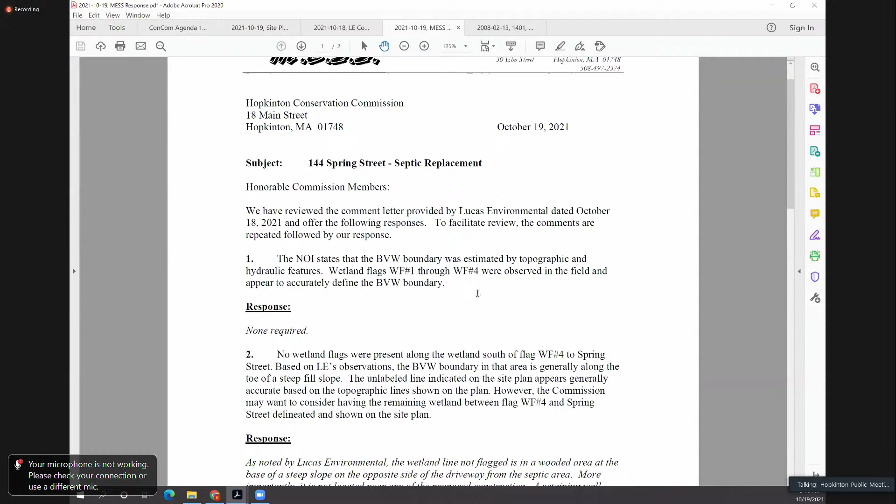Okay, if I can get a motion to issue a negative determination of applicability for 144 Spring Street. Moved, Janine made the motion. A second please. This is Ed, I'll second it. Okay, and we'll do the roll call vote. Melissa? Aye. Carrie? Aye. Janine? Aye. Ted? Aye. Ed? Aye. Jim? Aye. And Jeff is an aye.

Okay, thank you, Mr. McIntyre. Thank you very much. Kim, go ahead. I would just try to encourage the applicant - they filed a COC request, not a complete one, but I can work with you, Dan, on that. So I would just encourage the applicant to follow through on closing out that old order as well. Yeah, whatever you need, we did submit. I'm not sure what we missed, but let me know and we'll get whatever you need. Okay, thank you. Thank you. Have a good evening.

Okay, McCarthy, 22 Winter Street. This is a notice of intent for a septic replacement and garage alterations. And I need to read this one as well.

The Hopkinton Conservation Commission will hold a public meeting October 19th, 2021 at 7 o'clock virtually online to hear all persons interested in a notice of intent filed by Stephen McCarthy to upgrade a septic system and for alterations to an existing garage with associated site work. Location 22 Winter Street, assessors map B9, block 3, lot 0.

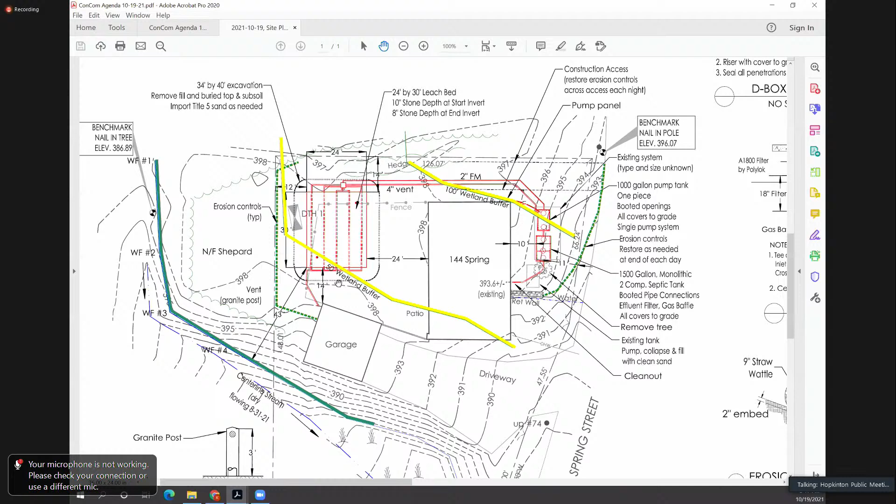Do we have someone in the audience representing the applicant? Yes, this is Seth LaJoy representing Stephen McCarthy. I'm the design engineer for the project.

Good evening. Basically what we're doing here is we are looking to take a currently failing cesspool and upgrade it to a leach field. There's an existing 4-bedroom house, and we are proposing a 4-bedroom system.

In the process of doing this, Mr. McCarthy is looking to put some plumbing in his garage and expand the garage slightly to the east, and remove a portion of the existing garage. So there's actually 98 square feet that's going to be removed from the building and 48 square feet that's going to be added onto the building, just making it a couple of feet wider.

The system is located within the 50-foot and 100-foot buffer zones. There is an existing perennial stream, Whitehall Brook, behind the property. I'm showing it as an approximate 100 and 200-foot riparian zone, because I didn't actually go out and find the bank, since there's a very large swamp that leads out to where that existing channel is. I actually took it off of the GIS map.

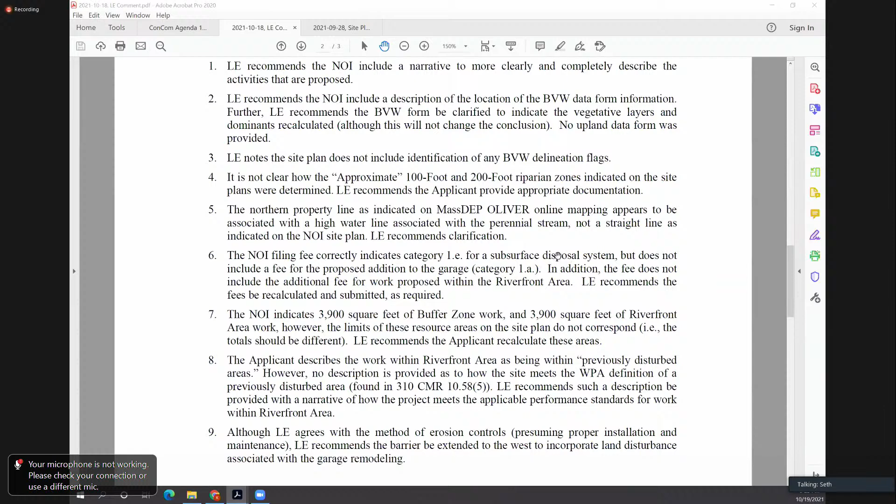So those are really the high points. 48 square feet though, I mean, that's not - and we're actually removing 98 square feet of impervious as well, which I think definitely meets any of the performance standards you guys are looking for.

I'm just pointing out what the commission typically asks all applicants to provide, as far as being consistent when an application is submitted, be it a large project or a small project. We don't want you to do unnecessary work, but we do need some clarity on the activities being proposed, disturbance, replication areas.

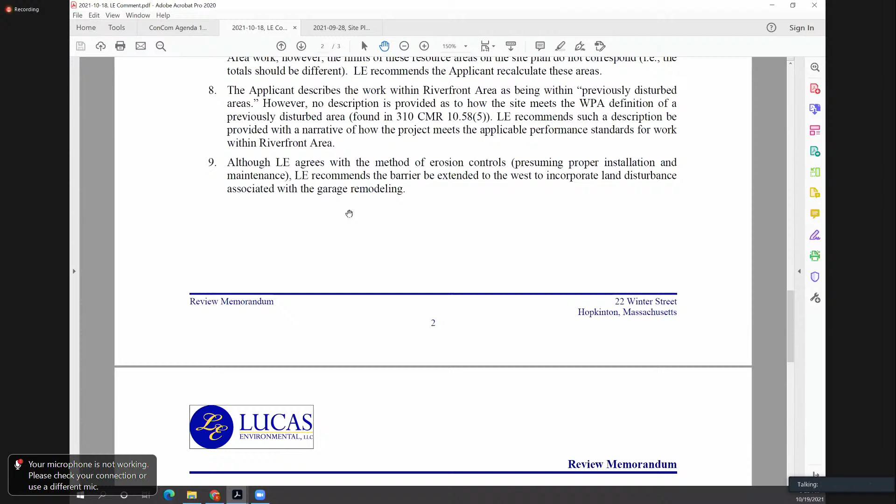I think Kim, can you bring up the plan again with the 100 and 200 foot riparian zones? I think I'm good, based on the scale of the project and that it's in a previously disturbed area. I think the estimate, I'm okay with that. We just need to make a note on the plan that it's estimated.

It is. It says - is it? Okay, yeah, sorry. 100 and approximate 200.

But I guess the point is, I think there's just a little bit of additional work that needs to be done, as Matt outlined in his letter. That's my opinion, but let me open it up to the other commission members, and just that we like to be consistent project to project. So questions, comments from other commission members?

Hey Jeff, this is Jim. Yes, Jim. I may have lost communication for a moment, but if there was a request to flag the boundaries, that seems unnecessary, as I think you were saying, because you know the whole thing is within those boundaries. It seems that topographic maps, aerials, and the GIS are adequate to locate the boundaries.

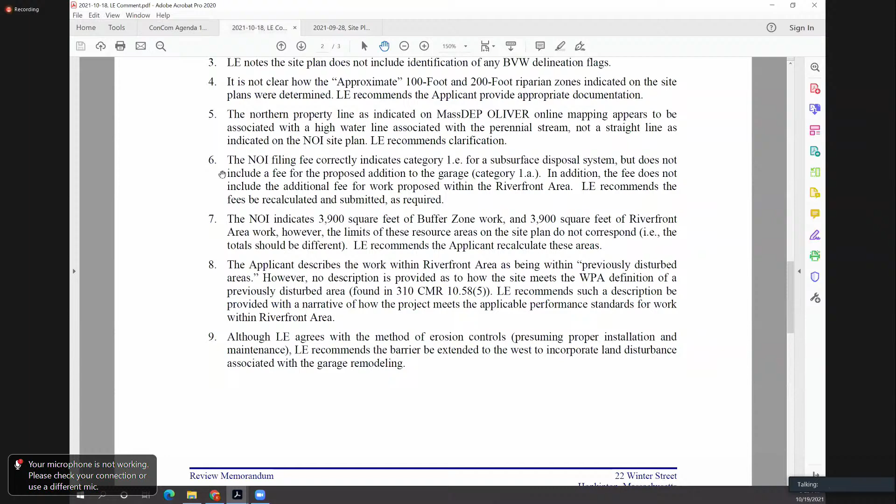Very good. Okay, comments or questions from the public on this?

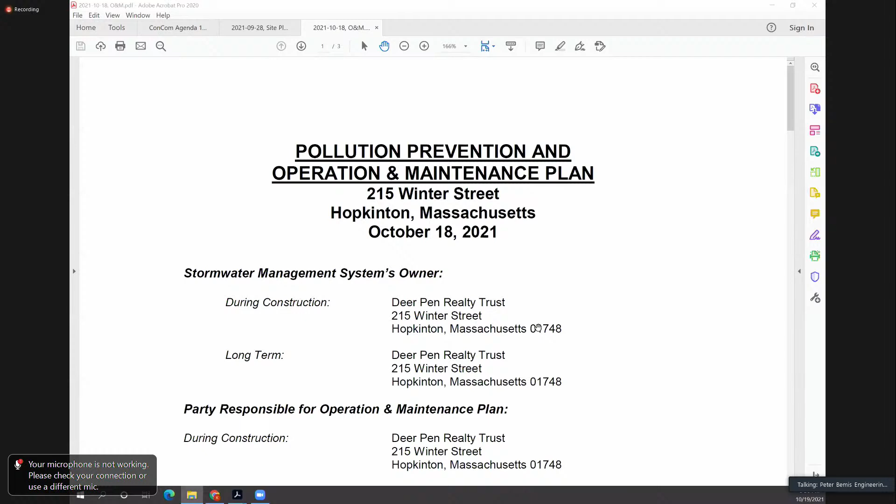So at the last meeting, we presented the updated plan that provided the PIB marker locations and detail. We discussed most of the other pending items of the site plan, and what was also requested was an O&M for our pollution prevention plan, and we did provide that.

I structured it as something that the homeowner would manage and control and keep records of, and in the event that the commission wishes to have a copy, they can demand it at any time. We kept it as a 5-year running average for the plan, because there are 3 rain gardens we want to make sure are maintained here. I just don't know if there's a structure for administering these things that the commission wants firsthand knowledge of, but we set it up that way.

I can easily amend it, but I did provide a detail for all of the separate items we have for our treatment system during construction and then post-construction. I think if you put the detail together in the O&M plan, that's all we can really require at this point, is my sense.

And the planting plan, was that addressed? So according to my notes, there are a couple things I'm looking at here. The plantings were on the detail sheet, the second sheet of the set had those plants identified. And we identified how many would go in and the distribution on them.

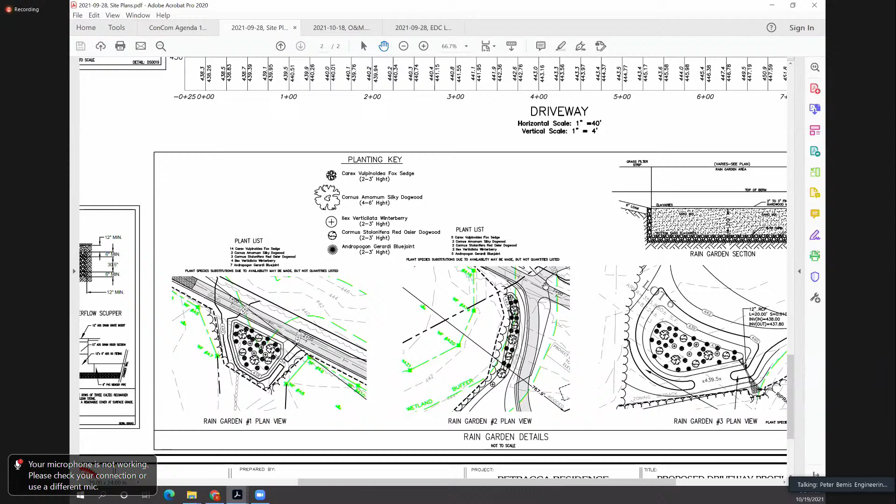There's a lot of woods out here. Our site's over 8 acres, and there's an adjacent site that Deer Pen owns, on the order of 10 acres. So there are lots of woods, and I just feel like this would give some diversification of that buffer zone. There are critters and foragers that would benefit from that, so we do expect it to be natural.

It doesn't require a lot of maintenance. You don't want woody shrubs to start taking over that wildflower, so typically it's mowed on an annual basis, and that's it. One time at the end of season you would typically mow it. And again, we've had good success with wildflower seeds on slopes like this.

Okay, so it's the fescue and native wildflower mix that would be right on that. Okay, and we're using a New England mix provided by the Amherst group. And again, the last batch we got had a lot of black-eyed Susan in it, that much I can tell you. I've got a slope that's full of black-eyed Susan right now, it looks wonderful. Yeah, that does look nice.

Okay, those are the open items I had on my checklist, so let me open it up to the other commission members for their comments and questions.

Through the chair, yes, go ahead. I wonder if I could just ask Mr. Verrill for his thoughts. I think the wildflower mix sounds beautiful, but I'm curious about its efficacy for erosion control and water control versus shrubs or trees.

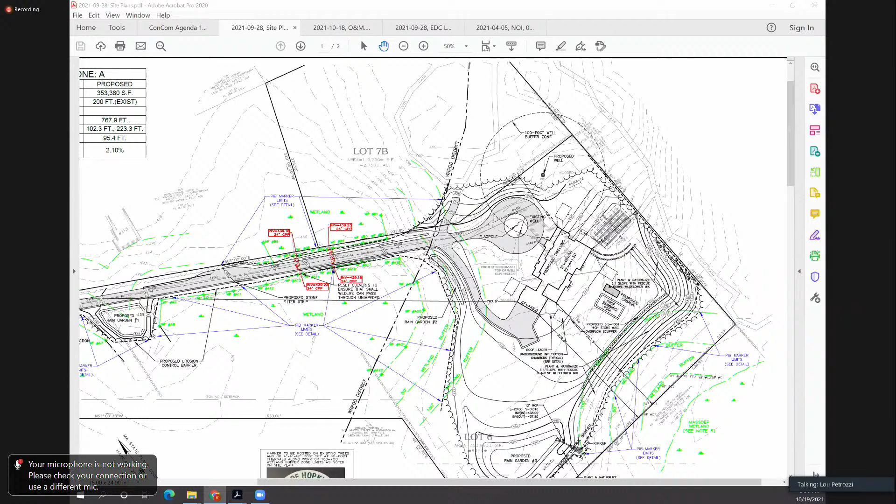Can you give us an update on where you're at with the infrastructure work, please, Mr. Petrozzi? Oh sure. Well, this past week, we were able to substantially complete the detention basin and the spreader. It's been loamed and seeded. We do have a small portion remaining along the northerly part of the property, and that will be completed probably later this week. Then the remaining portion of work from the outlet culvert, the swale to the detention basin, will be completed probably next week.

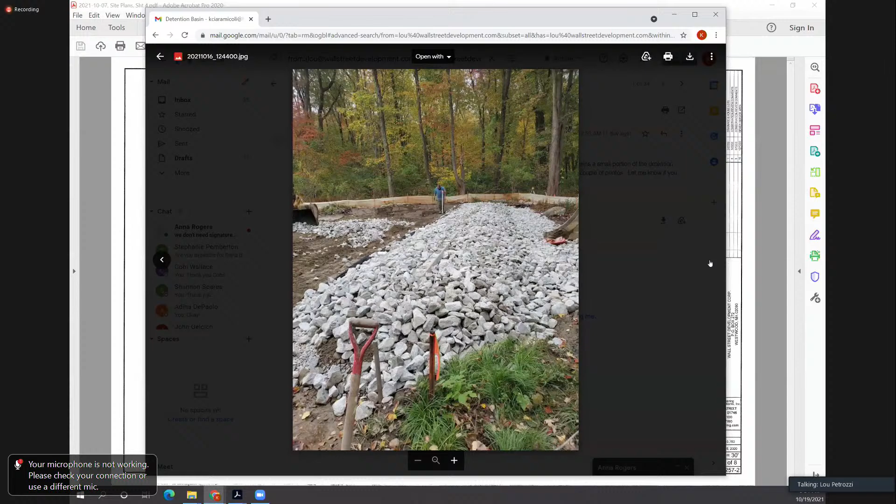I've sent some photographs to Kim earlier just to show the work that was completed over the weekend. So we're moving our way out of that area, and hopefully that will control the flow of any water out of the wetland. The wetland right now is back to where it would normally be. We'll see how it reacts when we have a substantial rainstorm. We had some rain over the weekend, seemed to work as expected. So we're moving along.

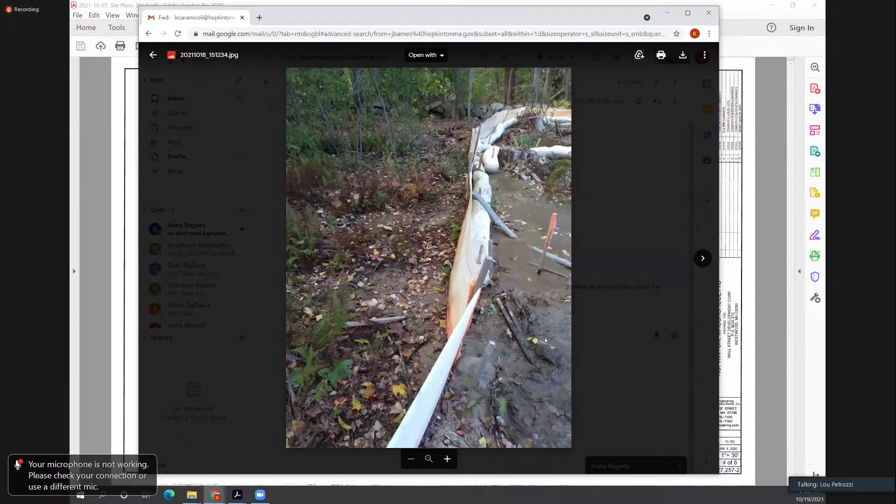We're scheduled to start the utility work out on Pleasant Street next week, and anticipate installing the sewer and water lines as we've talked about shortly thereafter. Okay. So we have the November 1st deadline for the infrastructure work.

Well, just out of curiosity, I don't know who imposed that November 1st deadline. I'm not going to get into the debate over, we have a 3-year order of conditions, and you're self-imposing. Well, I think it was part of the enforcement order that was issued because of the stormwater issues and the runoff onto the abutting properties and the pumping of water onto the abutting properties. That's why. I don't want to debate that issue. We're pumping on our own property. But it's in violation of the order in the SWPPP in the manner that it's being done. I don't want to get into a debate about it, but that's the position of the commission, whether you agree with it or not.

Right, but that has nothing to do with completion of infrastructure on a deadline of November 1st. Well, it does, because the objective of the enforcement order was to mitigate the stormwater issues on both your property and the abutting properties. Which abutting properties, Mr. Chairman, just out of curiosity, are you referring to, and which order of conditions are you referring to?

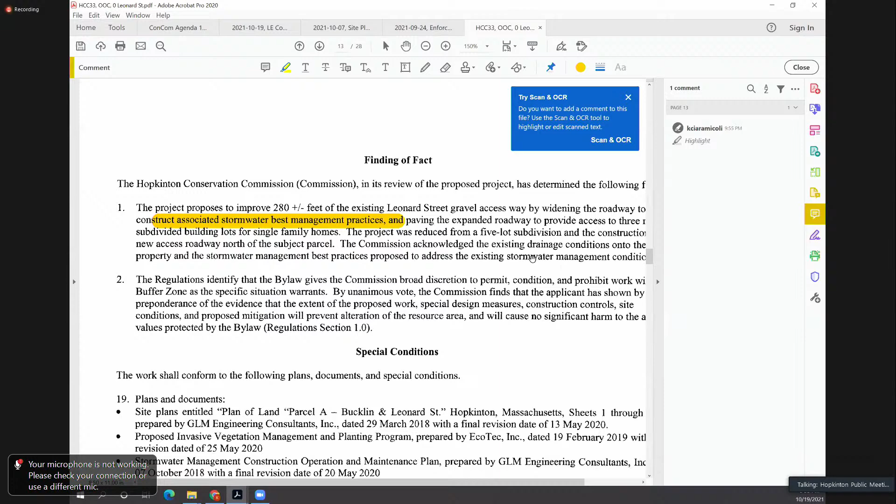Okay, and the pumping of water from your site beyond the erosion controls, has that been discontinued at this point? There's no more pumping required on the site. Okay.

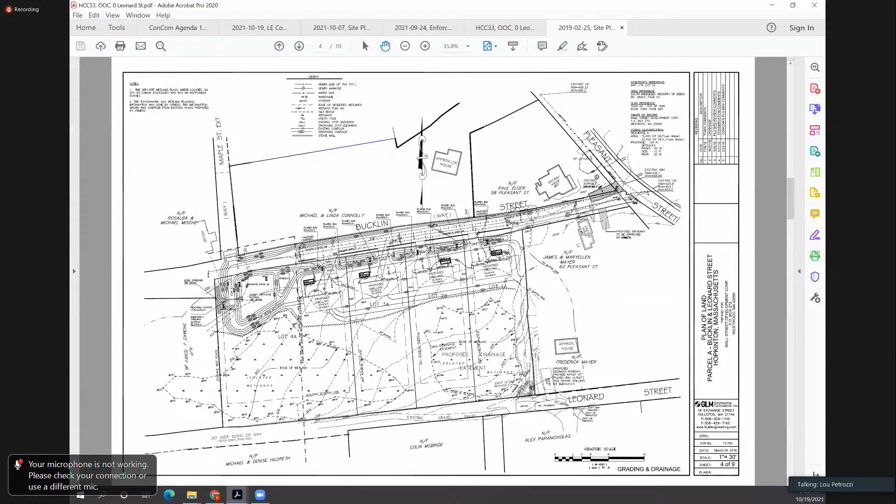That's my hope, and we spent quite a bit of time out there getting this thing prepared, hopefully it's done right and will operate the way it's designed. There has been a lot of work done the past week and a half, two weeks, so we appreciate that. I did see the erosion controls were repaired around the perimeter of the property, so we appreciate that. We'll continue to move forward with that portion of the project, and hopefully things will go well.

Okay, all right, Kim, did you have anything else to add? In terms of the site status? Yeah, site status, the infrastructure, roadway construction work. I don't have anything additional to add. I am happy to see that progress was made in relation to the drainage infrastructure recently. Yeah, okay, I concur with that.

Okay, all right, moving along to the amended NOIs. So we received your updated information.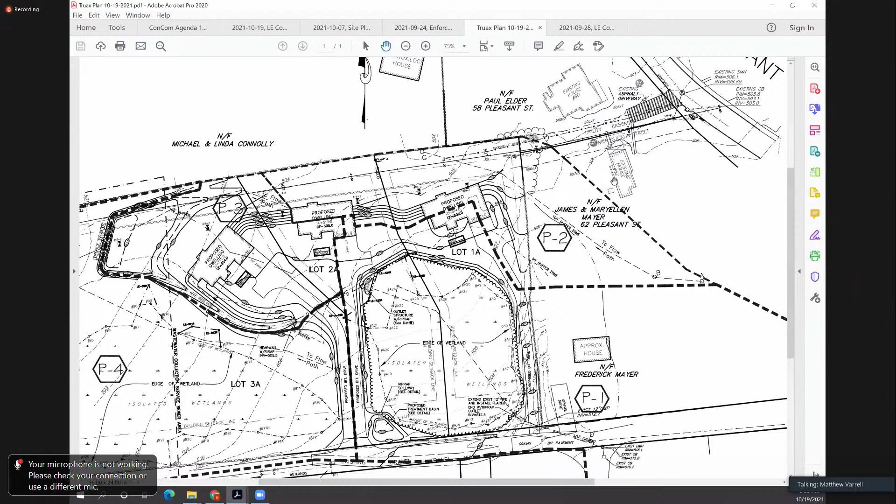My second concern was on the east side of the property. Along the east side there was a fairly shallow but defined swale shown all along, as Mr. Petrozzi said. In the original design, that water would come down that swale and be directed west along this area where at the time there was no fill shown, and it would flow down, eventually getting to the basin.

So now all this fill has been brought in, but there doesn't appear to be any consideration for where that water is picked up now. It appears it'll either pond in that corner or potentially overflow to the north onto the Paul Elder property. That's my concern, that it doesn't appear to have been accounted for. Kim, if you want to bring up that other plan you had there a moment ago.

This is out of the drainage report, showing the water would flow down this swale. If you look at the grades, following the grading through there, unless I'm reading it completely wrong, it shows the grades bring that water around to the west, along the Bucklin paper road and down to the basin. My concern is that water coming off the driveway along the eastern bounds just doesn't have anywhere to go anymore, and that may cause a problem.

So Mr. Truax addressed that, Mr. Petrozzi? Yeah, I think that's legitimate. I'm caught in the middle between engineers and consultants. If they're telling me the plan is fine - in fact, the original plan did not have a swale on the back of these houses, it just emptied onto the existing grade. This modified plan has significantly improved over the original plan.

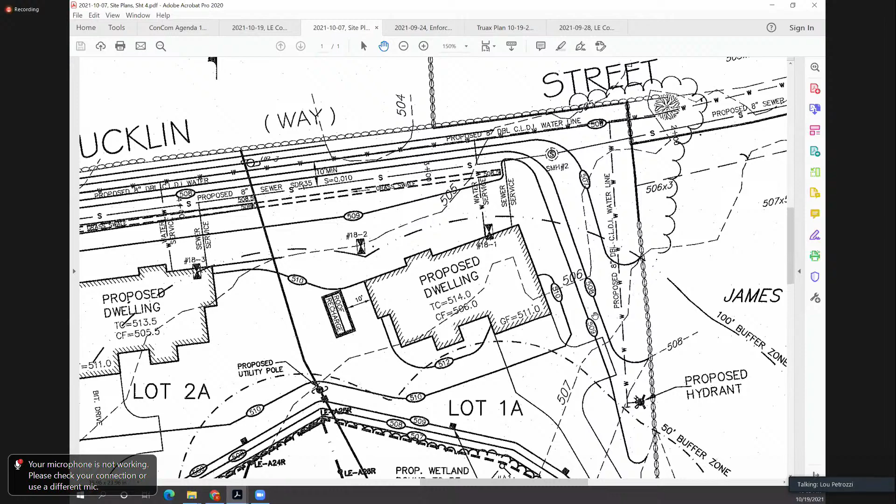Without interrupting, it looks to me like the 508, the 507 contour gets captured in the swale at 508 up above along where the water line is, and it goes down that swale. We're even taking some of the water from the Mayer property and actually putting some of that in the swale as well.

So if there's any puddling of water there, I'm sure we can grade a little bit and make sure it gets down in the area that we want it to get down. We have an easement in that area for installation of the utilities, so anything happening there when we install the sewer, water, and gas is going to be graded properly so that it goes in the direction we want it to go.

We have a utility access easement in that area, formerly Bucklin Street, to do work. That work will include whatever necessary grading needs to be done to get it in that direction. There's also a large stone wall separating the two properties, so what you see on one side of the wall isn't necessarily what's happening on the other side.

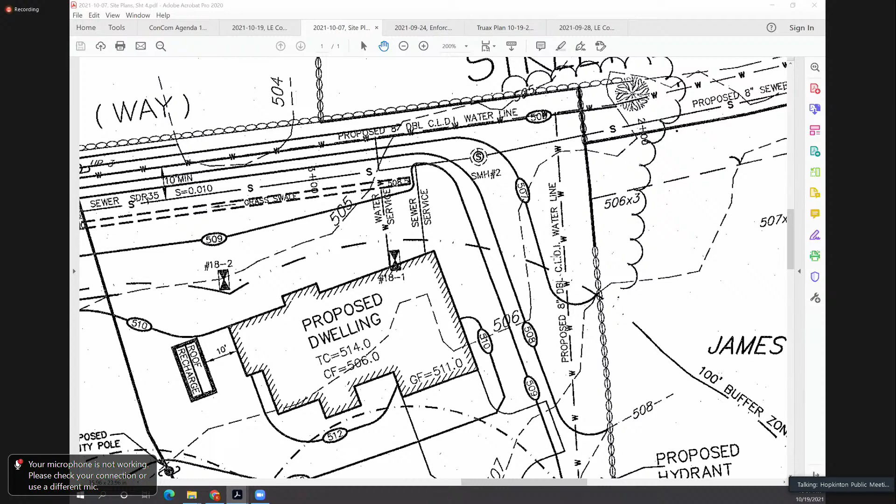When these houses are constructed and people buy them and move in, if there's stormwater issues, water being diverted to other people's properties, it's going to fall on the commission. So we just need to make sure we have our bases covered.

Understood, I appreciate that. But my responsibility too, as the developer or builder, is that we could be legally liable for any damage we cause to adjacent properties. So we're taking every precaution to make sure the houses we build are sound, don't have water in their basements, and that any water channeled outside doesn't damage other people's property. As we've said all along, this is going to substantially improve the adjacent properties. I don't know what else I can say — it's definitely going to improve the property.

Okay, got it. All right, Matt, so was that the only outstanding comment you had at this point? Yes, that was the major one.

Chair, go ahead Kim. Just a quick question for Mr. Petrozzi — who maintains the swale, and is it in an operations and maintenance document? It's a homeowners association, we're planning for them to maintain all the drainage swales and infrastructure being constructed, including the detention basin. That homeowners association will be responsible for plowing the Leonard Street area fronting the property, and probably driveways and other things if they decide to do it that way.

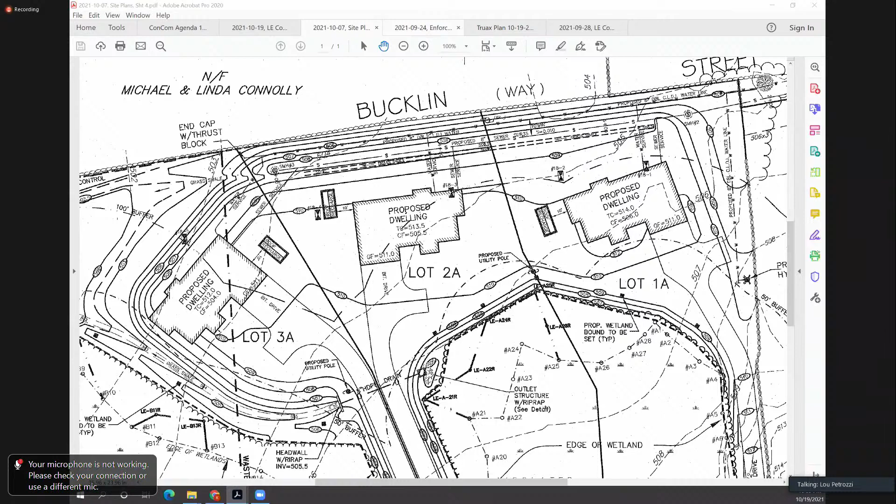So that'll need to be updated, Kim, correct? This is all going to — the swale in back of these houses, I heard you having a conversation on the previous application — this is really not even a foot deep. It's going to be a mowable yard area that you probably won't even notice is there.

Okay, great. Questions, comments from the other commission members? Questions or comments from the public?

Okay, I have a number here — someone has their hand raised. Jeff, go ahead. I don't know what your name is, but, 774-278-0432, did you have a question or comment? Go ahead and you can speak. I think you're on mute. I believe that's Mr. Terry — I don't know if there's a way you can unmute him, Jeff. Oh, there we go. Okay, Mr. Terry, am I all set? All set now? Yeah, we can hear you now.

Good evening, I'm Thomas Terry. I own the property on the west side, and all the water has been pumped over the retaining fences that were there, and it's been coming over onto my land — it's become a major problem. As was said earlier, the water used to flow from the opposite corner, the southeast corner of the property, over to the northwest. Now it was just admitted that it doesn't go north anymore, it goes west, which is all coming to me. So I object to the fact that someone was telling everyone how the abutters are all in favor of everything going on, that everybody's got high praises. I don't know of any, I haven't heard of any, and I want to take objection — if I were included, if some of my comments are misconstrued as compliments, it's wrong.

And the other thing I have—I'd like Beta to address this, and I'd like to hear about it—there was supposed to be a swale on the north side going down, and that north side swale was supposed to take care of the water and put it into the retention area. Instead, it looks to me like they were in there the other day and built something different.

They dug a 4-inch deep trench, probably about 150 to 200 feet, and it goes from the northwest corner of the property all the way up to the middle of the property.

Inside it, they dropped in what I understand to be a sewer connection, so that the person down below at the house on the very end of the Maple Street extension—right at the northwest end of this project—could use it.

You can see it through the trees, but you get there by going across Pleasant Street on Maple, down into the Maple Street extension—it's the last house down in there. Apparently there's been some kind of arrangement where they have a bad septic situation, or maybe no septic at all, down there.

So Mr. Petrozzi is apparently going to allow them to pump the sewer up into that trench. And what I think that trench is going to do is just encourage more water to come down and flow from an easterly to a westerly direction, which is going to put more water on my land.

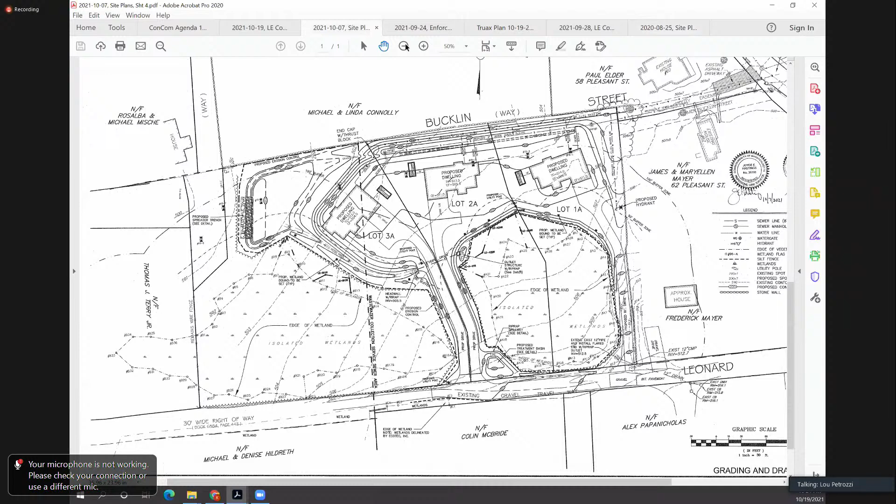We installed it at this point because it would be impossible to get back there and disrupt the detention basin if it was left to a later date. So as a courtesy to the people who own the property at the end of Maple Street Extension, they called me and asked me to provide a sewer connection for them because they have a failing septic system. This would be a cheaper alternative than for them to have to dig up Maple Street Extension and pave a new roadway. So simply as an accommodation to them, I extended a 2.5-inch pipe, put it in the ground, and it's up to them at some point if they want to make a connection from their house to the sewer.

Force main in the ground. To the sanitary sewer system maintained by the town? Yeah, well eventually, according to this plan, as you know, we've tried to do a gravity system out to Pleasant Street for the houses that we have proposed. So this force main will go to the last manhole that we put into our development and then go gravity out to Pleasant Street, if you can follow that.

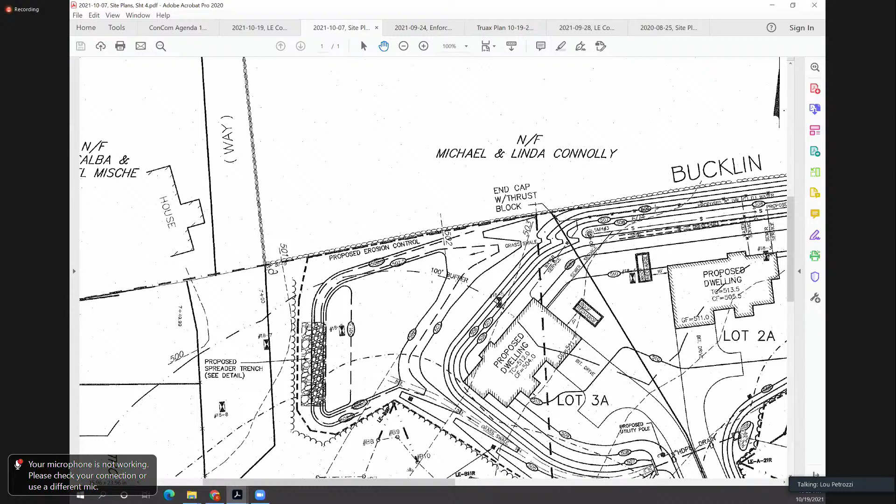So it's infrastructure that's in place. It'll be capped off at the end. It's capped off right now. Yeah, we did. And then they can tap into it at some future date if they decide to connect to the town's sanitary sewer. We're going to grant them an easement. They are eligible for sewer because they're in the sewer service area, but ultimately the connection has to be granted by the DPW for them to make use of the pipe we put in the ground.

Unfortunately, Mr. Terry came out to the site while we had excavated the trench and were putting the pipe in, and he thought we were coming up with some sort of scheme to drain more property in that direction. That's certainly not the case. So the trench is being backfilled. The trench is backfilled now, and as I said earlier, we're going to complete that section of the detention basin probably by the end of this week. The weather's supposed to be good.

What size line was that, 2 inches? I think it's a 2-inch pipe. What necessarily will have to happen for that property is they'd have to put a grinder pump in a tank. I recommend they put it in a tank that will take the sewage and pump it up to our manhole, and then it will go gravity out to Pleasant Street. So it's a typical force main, the pipes are usually 1.5 to 2.5 inches. There's no magic formula to that, but it seems small for a sanitary sewer connection — but I'm not an engineer. Not that I want to sound crude, but when the stuff is coming out it's like puree, if you can follow that, it's pulverized kind of stuff.

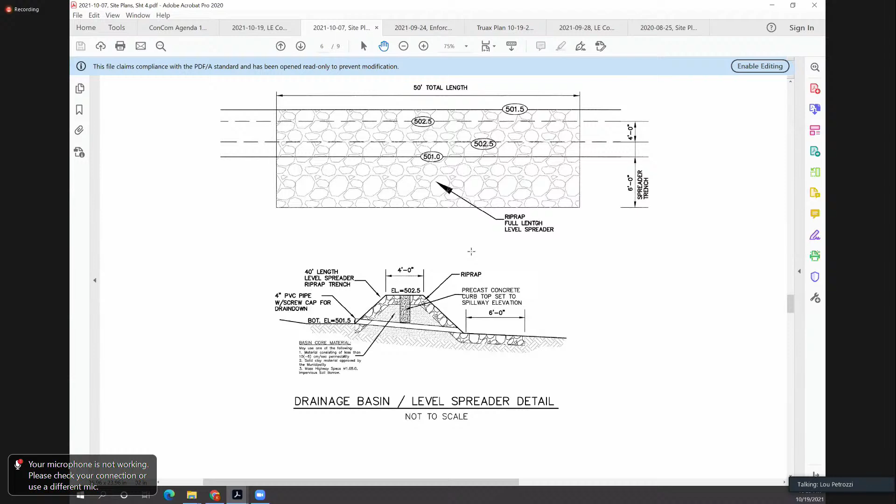Okay, Mr. Terry, okay, hold on — really, I can't really take this conversation much longer. Mr. Terry's been out on my property. Mr. Petrozzi, can we stop? I'm getting a little tired of it. Okay, let's just — it's been a long meeting. Let's just get to the points here and move on, okay?

Yep, the last point with the runoff from Boxwood and Leonard Street from the basements - I know Mr. Petrozzi had, as Mr. Terry said, proposed to the town to put some type of piping in to divert that water. My recollection is that the town couldn't handle the additional capacity with the system they had on Pleasant Street, so that wasn't a viable option. That's really outside the jurisdiction and scope of this project.

Mr. Chairman, may I say one thing about that situation? We currently have litigation pending with the developer of Box Mill. We've offered and proposed that if you go through his subdivision during a rainstorm, he'll have no water in his detention basin, and we'll have 3 feet of water on Leonard Street. What really needs to happen on his subdivision is that there have to be a couple of extra catch basins installed midway down the roadway, and the water needs to be put into his detention basin - that will reduce at least 60% of the water coming from his property right now. So we're trying to handle that with the planning board, and we think there's an opportunity to alleviate some runoff. We're trying to alleviate the water coming onto our property and eventually down toward Mr. Terry's property, but it's difficult for us to do that on our own. We need people to help us out on that.

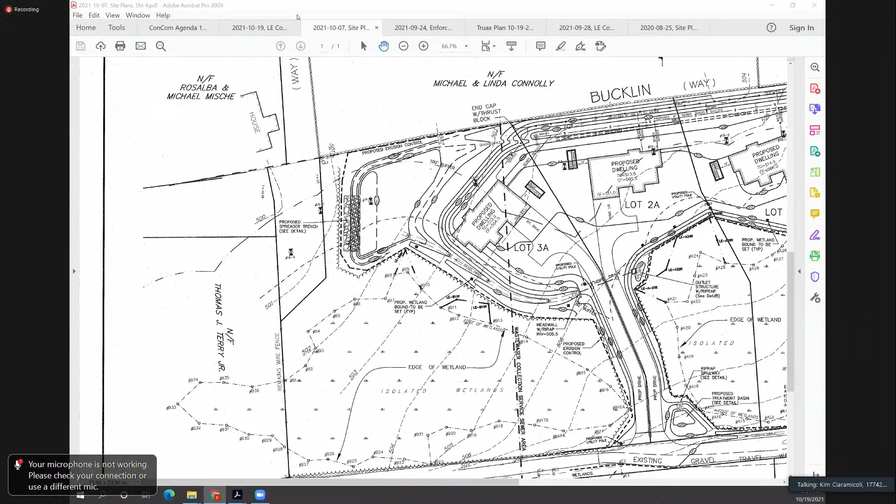Yes, do we have an analysis from Beta that this is going to work? They've already reviewed it, Ed. Beta reviewed the last plan iteration. The swale and the berm were added as part of this process, and Beta has not provided a review on that.

Thank you, Kim. Okay, but I don't believe that Beta is currently funded to provide such a review. I'm not - listen, they reviewed it without the swale. The swale is a benefit, so I'm not paying for any more reviewing. I think if they said okay to the other version, this shouldn't make it any worse. Thank you.

So I made that motion - did we get a second? Is that question still out there? Yeah, it's still out there. I think if we approve this without Beta's approval on a revision to the plan, it sets a really bad precedent. Except that we have the expertise on our commission, and getting the opinion from Melissa and/or Kerry is enough for me. Is Kerry still on, or did she drop off? Let me see.

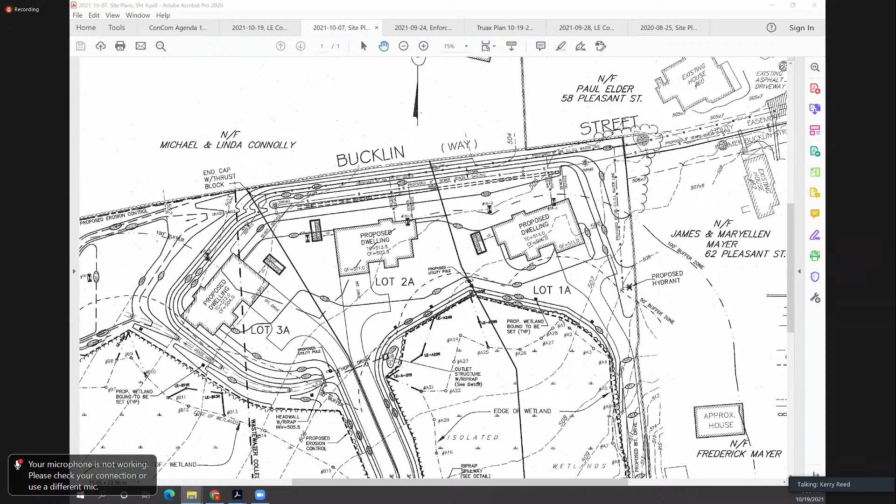So Jim, you made the motion. Is there a second? Kerry? Okay, I and second, we'll do the roll call vote. Melissa, Aye. Kerry, Aye. Janine, Aye. Ted, Aye. Ed, No. Jim, Aye. And Jeff is an aye.

Okay, lot 2A, if we can get a motion to approve the amended notice of intent. So moved. And a second. Second, Janine. All right, and we'll do the roll call. Melissa, Aye. Kerry, Aye. Janine, Aye. Ted, Aye. Ed,

Ed, you're on mute. I'm holding the damn thing down. I said, I'm gonna vote no again, and this is not meant to disrespect any of the capabilities of any of the people on this commission. No, thank you, Ed, we understand that. Okay, Jim Aye, and Jeff is an aye.

And lot 3A Leonard Street. Motion to approve the amended notice of intent. So moved. And the second. Second, Ted. All right, Melissa, Aye. Kerry, Aye. Janine, Aye. Ted, Aye. Ed, No. Jim, Aye. And I'm an aye.

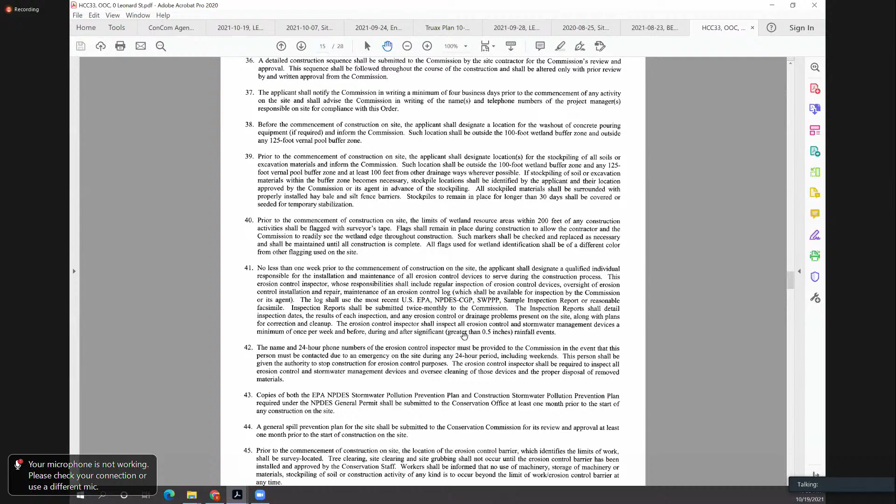Depends on what order a condition is in the approval, then we expect that you're gonna follow it. Well, okay, like Kim said, we're not anticipating applying for any building permits at this point, and hopefully by the time we get to that point, we'll be in a better position to have a conversation about it. And let's get the work done that we can get done now and talk about building houses later. And if, you know, we just appreciate you working with us and trying to move this along appropriately. Thank you, I had to buy a new pair of boots because I've been in the mud all week.

Okay, Kim, should we vote on you signing off on the orders for this? That's entirely up to you, we do have a meeting in two weeks. Okay, we'll just hold off then, it's been a late one for tonight, so. All right, thank you very much, Mr. Petrozzi. Thank you, bye Kim. Good evening.

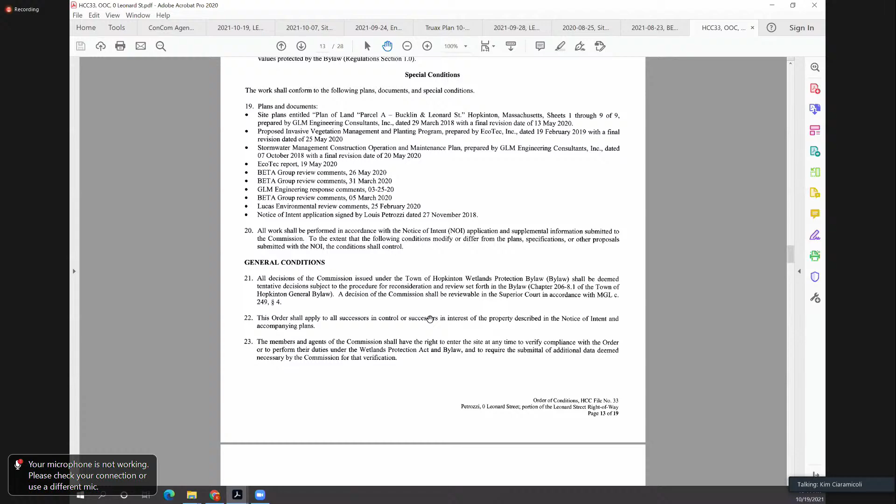Okay, I think that wraps it up for this evening. Kim, any outstanding items? We did have a request from 55 Elm Street to issue the order as soon as possible so that they can make end of season cutoffs for their septic. If the commission feels so inclined, they could authorize me to sign an order for that particular site. Yeah, let's do a quick vote on that then.

If we can get a motion to allow Kim to sign the, it was a notice of intent, correct? Yeah, the order of conditions. So moved. All right, and a second. Thank you, second. And we'll do the roll call. Melissa, Aye. Kerry, Aye. Janine, Aye. Ted, Aye. Ed, Aye. Jim, aye. Jeff is an aye. All right, it's been a long meeting, everyone.

Sorry about that, hopefully we won't get two more of these in the near future. So we'll do a quick, if I can get a motion to end the meeting. Adjourn, so moved. Second.